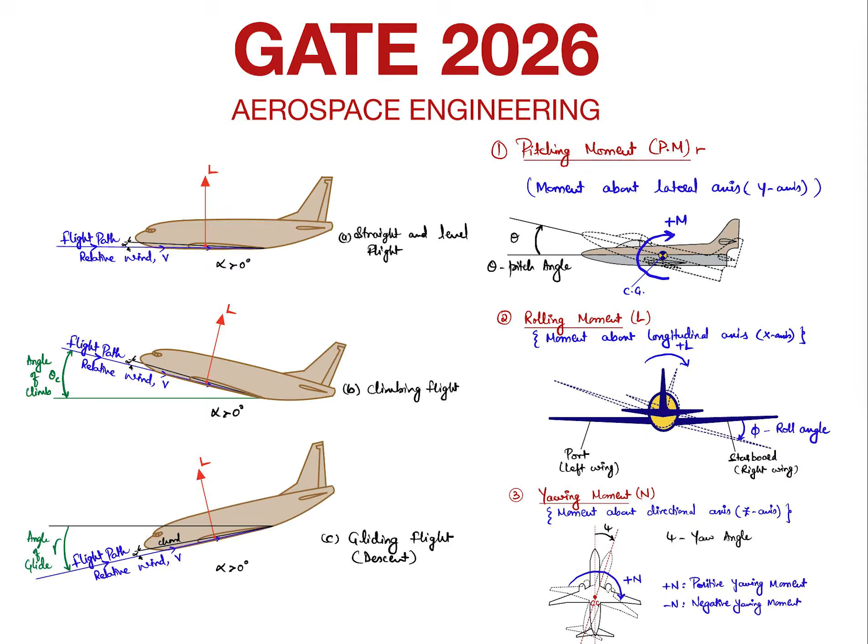What we have in GATE 2026. So the GATE exam is an exam which is like a common platform to assess everybody who has passed through engineering.

We are focused on aerospace engineering, so GATE AE 2026 tentatively will happen in the second week of February. Every year it happens mostly in the second week of February, probably on a Saturday or Sunday.

Its question paper will have 65 questions. That is also subject to change, they can change this, but for a long time they have fixed on this particular thing.

So it has two categories. We'll be teaching everything in the syllabus, even the math and aptitude. It has general aptitude, which carries 10 questions worth 15 marks. And you have a technical section.

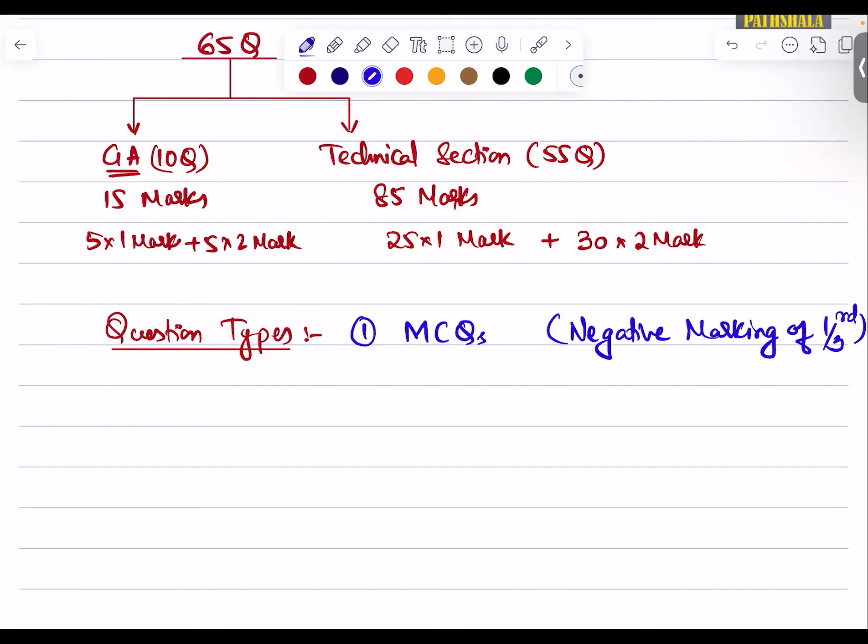Question types have 3 categories. The first category is called MCQs. You will have negative marking on this, negative marking of 1/3 of the mark. So if you make a mistake on a 2 mark question, 2/3 marks will be deducted. If you make a mistake on a 1 mark question, 1/3, that is 0.33 marks will be deducted from your positive marks.

Then the second category you have is MSQ. In MCQs, only 1 answer will be correct, whereas in MSQ, 1 or more than 1 answer will be correct.

Then you have the third category. This second and third category don't carry any negative marking. This is called numerical answer type, it will be a kind of numerical value which you will fill in the blank.

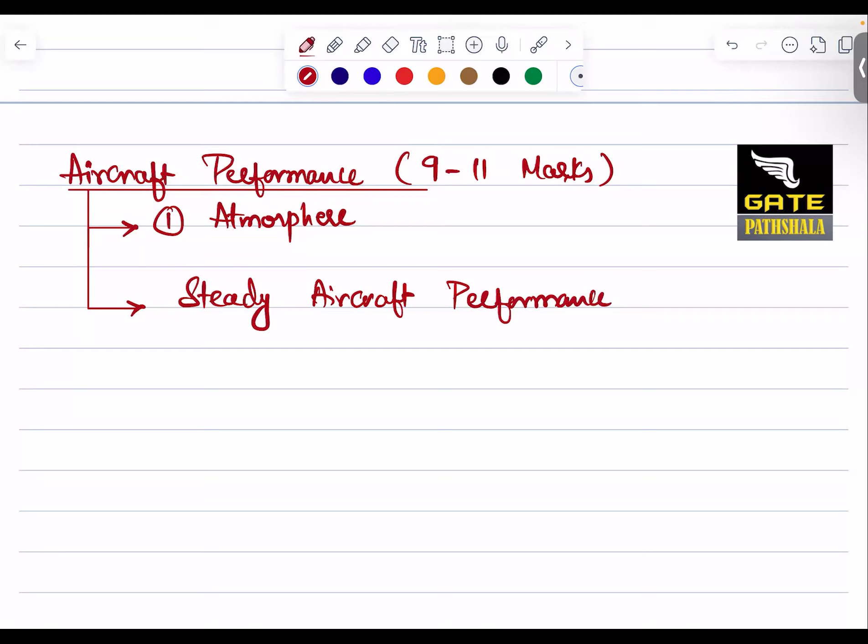Steady aircraft performance. In steady aircraft performance, we will begin with our first topic, that is our chapter 2, will be basics of flight mechanics. So what is lift, drag, mean aerodynamic chord, mean geometric chord, several other camber characteristics, what our flaps will do, what are control surfaces, all those things to do.

So probably in next lecture we'll cover up that. Okay, then we will enter into straight and level flight. Straight and level flight. Then

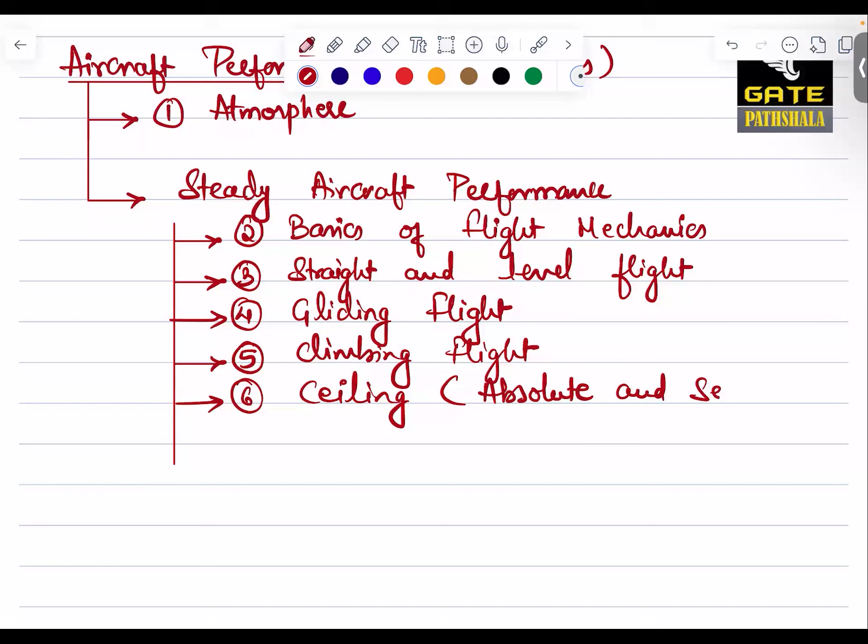we'll be going for something called gliding flight. Gliding flight is called the power-off flight. Then we have climbing flight. Then we'll be going for next topic called ceiling. This has two topics, one is called absolute ceiling and service ceiling. Okay, hope you guys are noting this.

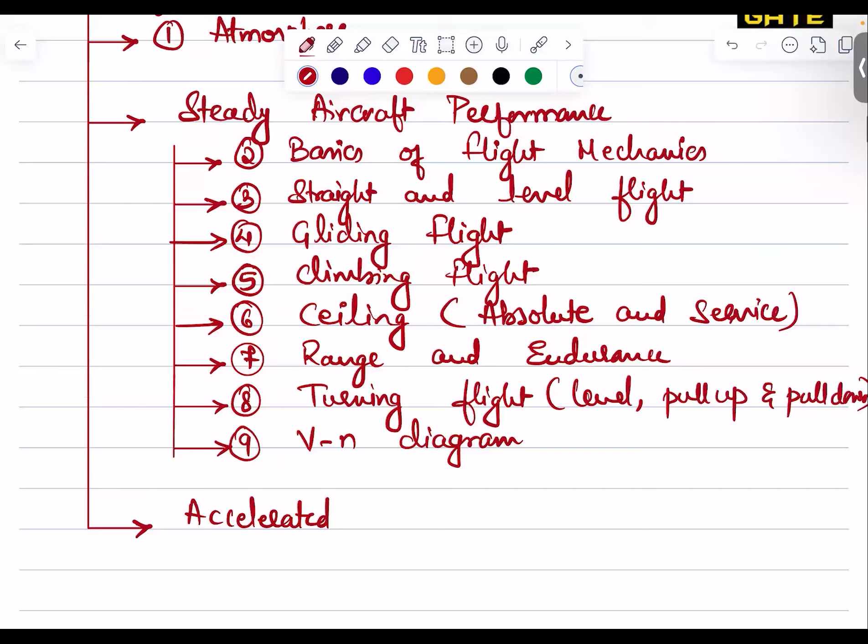Then coming back to this, again under the main aircraft performance, we'll have unsteady aircraft performance, or you can say accelerated aircraft performance, accelerated or decelerated. So once you are having acceleration or deceleration, it's called unsteady aircraft performance. So in its accelerated aircraft performance, again you have two topics.

This should become your chapter 10, that is called takeoff performance. Okay, next you write landing performance. Okay, can I go ahead, everyone? Hope you all noted. Yes, sir.

Okay, you write references for this. The first reference for this is Introduction to Flight, Introduction to Flight by John D. Anderson. Okay, then the next book is this book.

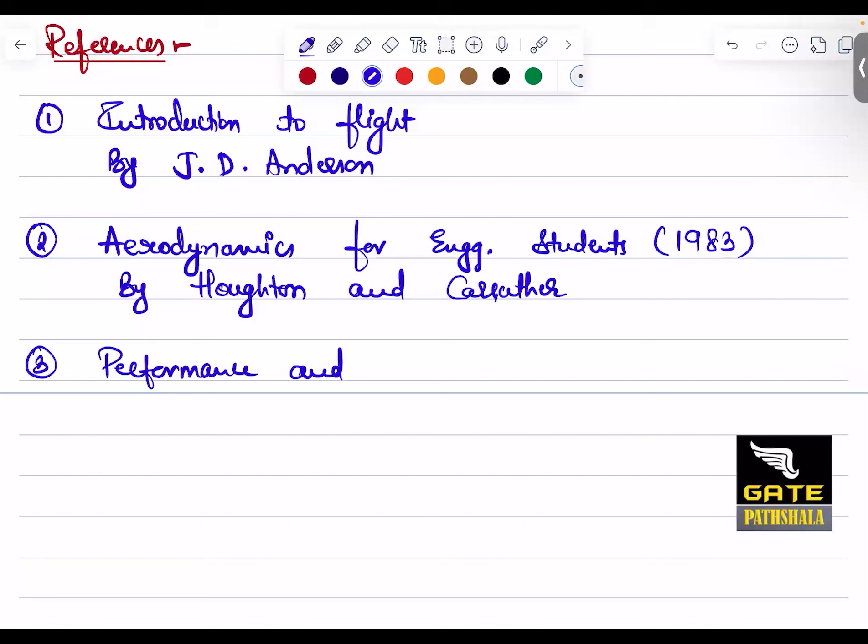Carru, Carruthers. Okay, then the third book that you should be using is Performance and Stability of Aircraft by J.B. Russell.

Then there are other books also. Okay, like you can make use of something called Bandu N. Pamadi, but that will take you to another level. So if you want to go for further higher levels, you can refer to books like Aircraft Performance by Maido Saarlas also, that's a slightly tough book. Okay, so this would be enough for you guys. Apart from this, you can use 1000 Solved Questions and Answers by Keith Williams, that is also a nice reference. Okay, can I go ahead, everybody?

Guys, can I go ahead? Yes, sir. Okay, so let's start.

So we'll begin with some basics. You write: airfoil nomenclature. Airfoil nomenclature. I'm assuming that you are just a 12th pass, you don't know anything about aeronautics or flight mechanics. So we are starting from scratch, assuming you don't even know what is called angle of attack, or what is camber line and all that. I'll quickly take you through all the basics step by step.

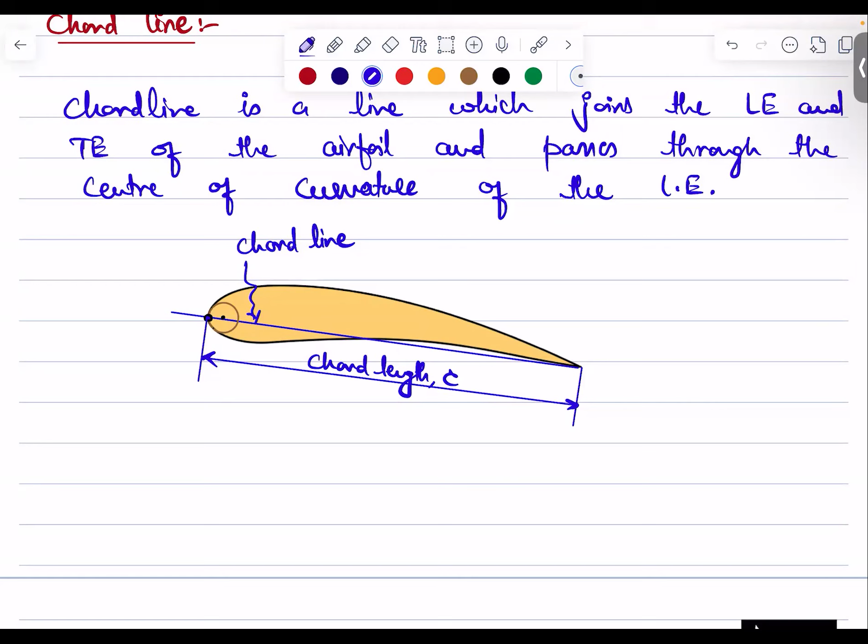Ashwin, you guys did this already, right? Yes, sir. Fine. Just bear with me for some time. There are some new joinees too. Sure, sir. Take it as some small revision. I'll add new things, obviously; that's my usual behavior. Every time I do something, I'll add new things. Okay. So, everybody noted this? Kishore? Brinda? There is a mute, unmute button. Please use that and respond. Yes, I have noted. Okay.

Write a heading, Camber Line. Now, let's draw the same airfoil which we have here. Let me copy this. For this airfoil, I want to know where my camber line is. One of the simplest ways is you can draw a set of circles and get the centers of these circles. Basically, a mean camber line is a line which divides the airfoil into two equal parts.

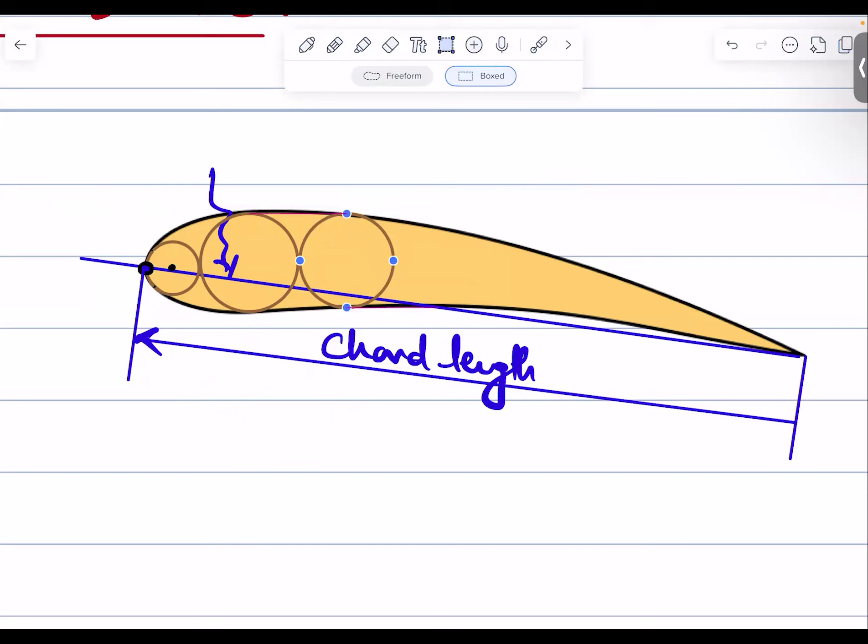So you can draw some circles touching the upper surface. In fact, you can draw the first circle, that is the nose radius circle, then the next circle like this, then the next circle like this. You fill the whole domain with these kinds of circles. Come on, quickly finish this. Parallelly, you draw this. Then find the centers of these circles and mark them.

Then, if you draw a line from the leading edge to the trailing edge which is the locus of the centers of all these circles, that line will be the mean camber line. This is the line passing through all these centers. This line will divide the airfoil exactly into two equal halves. The blue line is your chord line, whereas this one is your mean camber line.

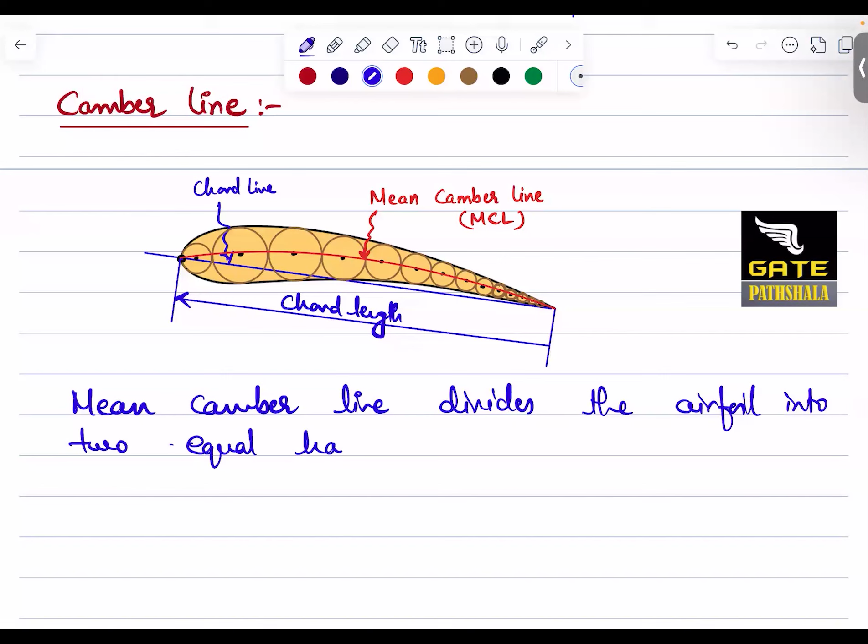Mean camber line. I'll refer to this as MCL. Mean camber line divides the airfoil into two equal halves, as shown in the above figure. Okay.

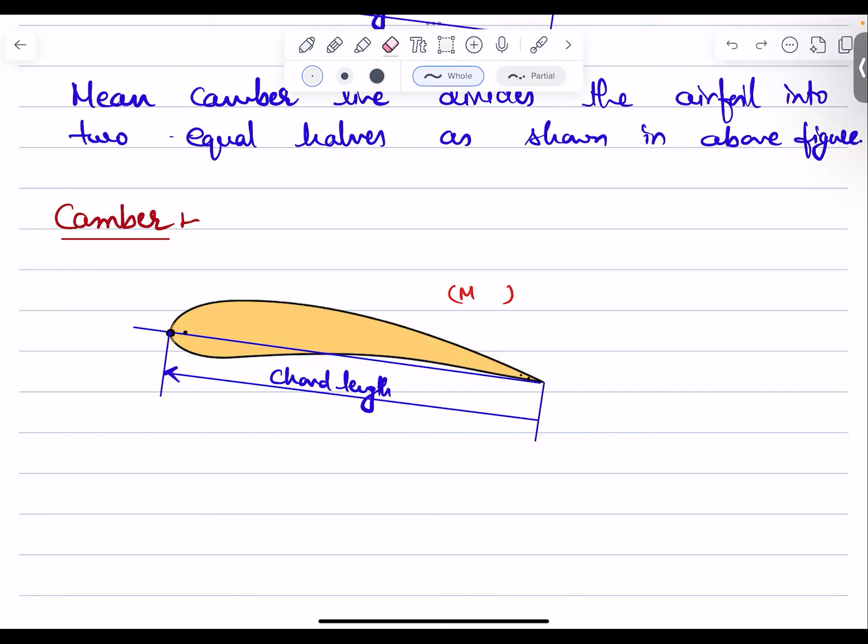Now write a heading, camber. Camber is nothing but some distance. Let's see what this distance is. What is the camber of an airfoil? Let me draw the same figure again, the previous figure in which we got the chord line and the camber line. Let me erase all these unnecessary things and put it here. You draw this figure, everybody.

So here you have two lines. This one is your chord line, and this one is your mean camber line. If you find the distance between the two lines, the mean camber line and the chord line, measured perpendicular to the chord, this distance is what is called camber. Can I go ahead, everyone?

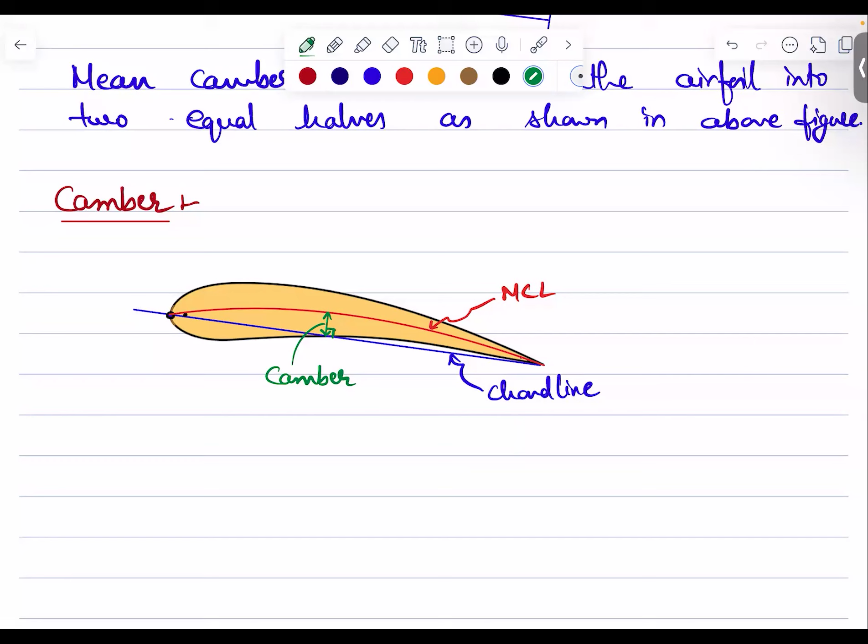Yes, sir. So you draw this and write: the transverse distance measured perpendicular to the chord line, between the chord line and the mean camber line, is called camber.

We'll go step by step. If you have any doubt, do not hesitate to ask. Every lecture, before class, in between or after the class, we are open for doubts. We are here to help you out. Fine, everybody. Shall we continue? Guys? Yes, sir.

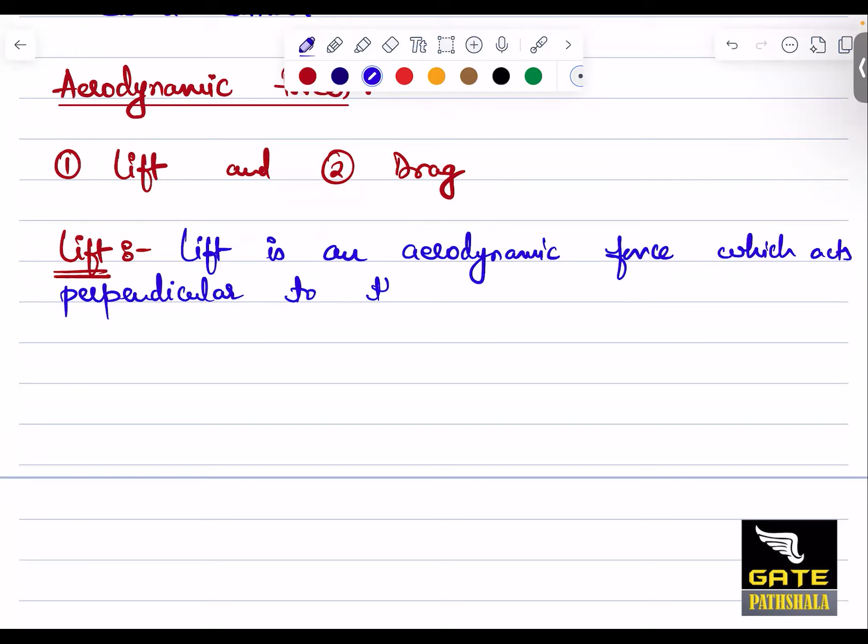Lift is an aerodynamic force which acts perpendicular to the relative wind. Okay. So how do we define this? Let me take that same airfoil. Okay. Let me take this airfoil. So there are different ways you should see it.

So usually a mistake happens because people teach this one way, like this. This is the most general way you will first hear about lift. That's why you think lift is an upward force. Okay. So you draw this. So what is this? This is your chord line. Okay. This is your chord line.

And let's say you kept this body in a wind tunnel and the flow is coming with a relative wind like this. So what is this? It is a relative wind. This is the flow which is coming with a relative velocity. You can say free stream for a while. So in this case, your relative wind is nothing but your free stream. So let's say flow is coming like this.

So this angle between the relative wind and the chord line is what is called the angle of attack, alpha. AOA, I use it for angle of attack. Is that fine, everybody? Can I go ahead?

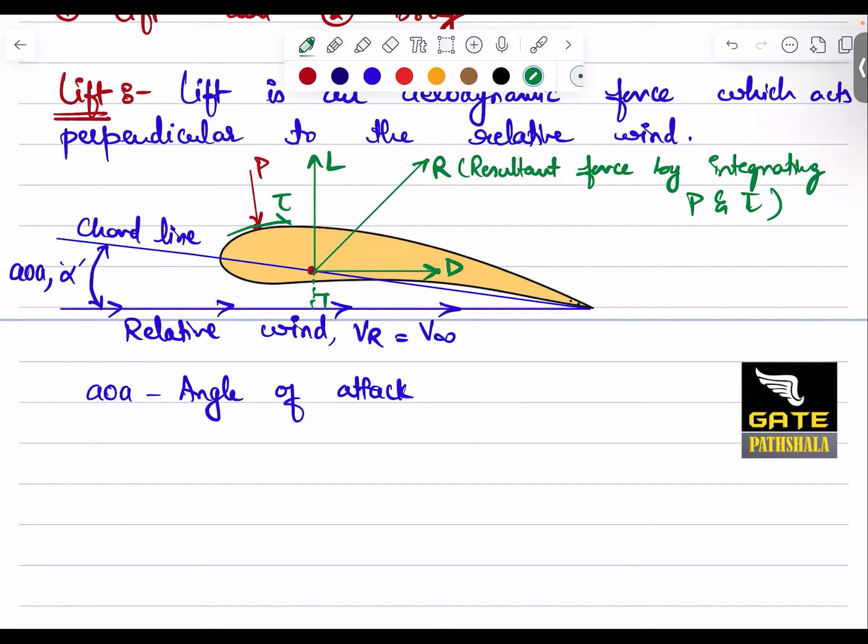Now, if you resolve this R parallel to the relative wind, you will get a force called drag. Draw this, everybody. Around the whole surface, when you integrate P and tau, you get this resultant force. If you resolve it, you get lift and drag. Perpendicular to the relative wind you get lift, and in the direction of the relative wind you get drag. Have you finished this figure, everyone? Yes, sir. Okay, let's go ahead.

Write a heading, drag. Further we'll discuss lift, then we'll go for the drag. So here, if I just memorize this, I'll think that, like she said, lift is an upward force. But it's not true in all cases. Now, let me take one aircraft. Let me take some nice aircraft for you. So this is my aircraft.

Now, this aircraft is flying from right to left. You make the airplane stationary and pass the relative wind in the opposite direction. How would the relative wind look? This will be the relative wind, if you stop your aircraft and pass it in the opposite direction. So the aircraft is moving through stationary air. We made the airplane stationary and we are passing the relative wind in the opposite direction.

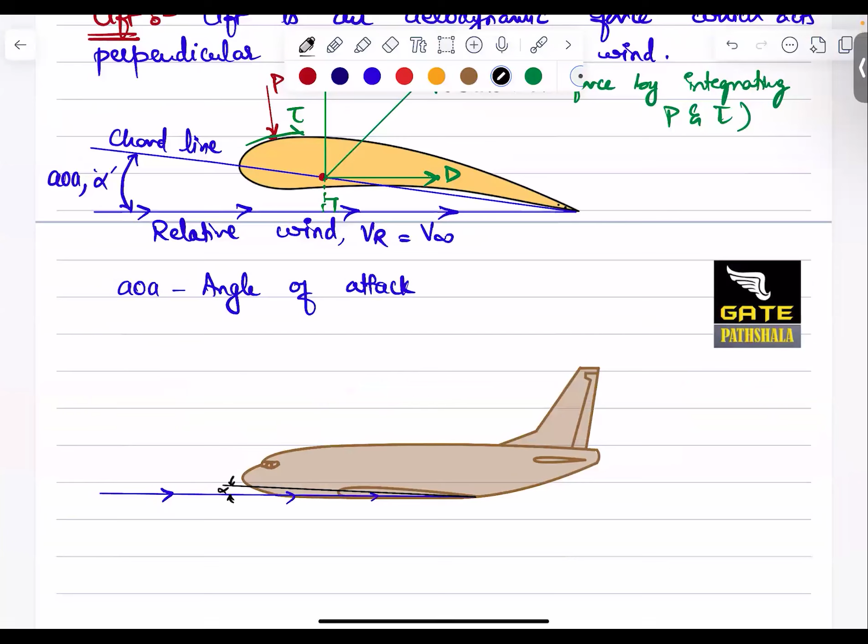And if I draw the chord line, this will be the mean aerodynamic chord line. So this is your chord line. The angles are very small, but you can see this is your angle of attack alpha. It's a positive angle of attack. The plane is going straight and level for now; later we'll change this. At this point, you draw lift.

Our interest is lift in this case. We'll focus on drag a bit later; you need a lot of information to understand drag. So this is your relative wind, or you can say flight path also. If you are not making it go like that, you can still say this line is the flight path. Lift is a force which acts perpendicular to the relative wind or flight path. Both are fine.

Even if we stick to this figure, lift is an upward force. Right? But that is not always so. That's why the definition of lift as an upward force is applicable to just a few cases. But lift as a force which acts perpendicular to the relative wind will be applicable everywhere. Can I proceed, guys? Yes, sir.

Okay. So this plane is in straight and level flight. The plane is not going up or down. It's flying straight and level. Write beside that figure: straight and level flight. So these are the cases. Let's go to the next case.

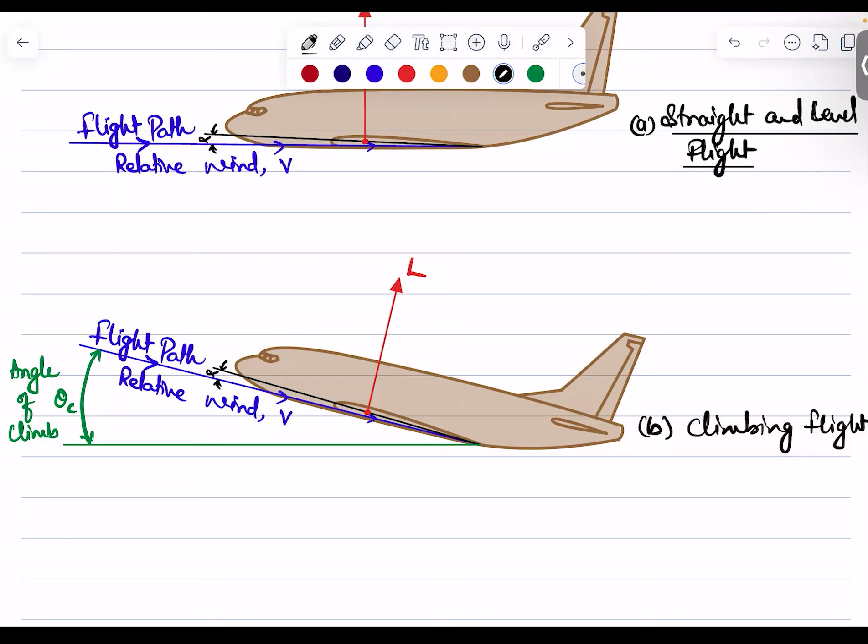Come on, guys. Don't try to become an artist. See, I made this figure by spending some time. In my free time, I draw things like this. For me, each and every part is different. Don't try to do that in one day. Can I proceed, everybody?

Yes, sir. Okay. Now take the aircraft and let's allow it to glide. This plane is going to descend from one altitude to another. So I stop the airplane at its instantaneous position and pass the relative wind in the opposite direction. Its flight path is going down like this. So this is also at a positive angle of attack. This is C. It's called gliding flight, or descending flight, or flight in descent. Make a note.

In all three cases, I kept the angle of attack the same. None of these are negative angles of attack. All are positive. Alpha is greater than 0 here, here, and here. They are not 0, not less than 0. Many people think this is a negative angle of attack flight. That is a really bad way of understanding negative angle of attack. Can I go ahead, everyone? Come on, be quick.

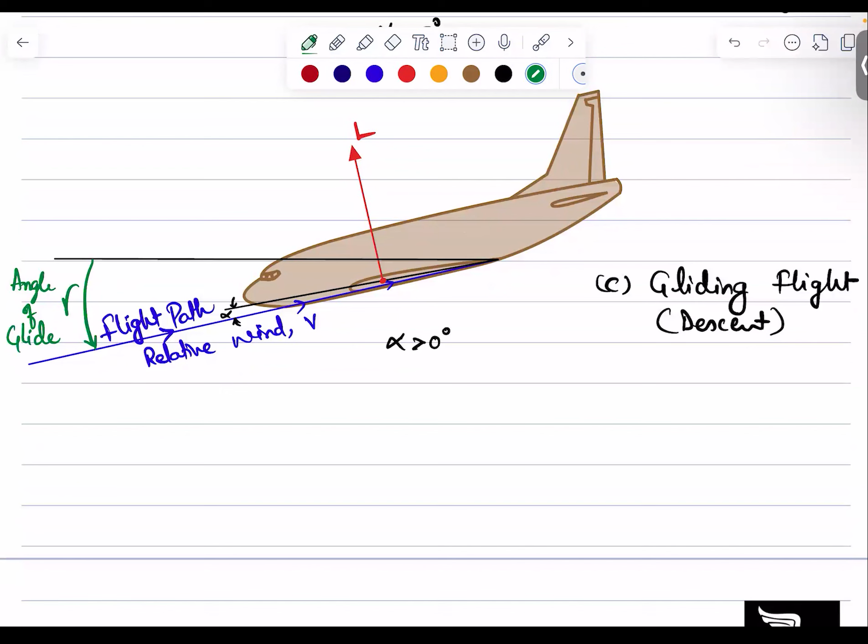So with this, you should have understood what is angle of attack. It is the angle between the chord line... this is the chord. So mean aerodynamic chord, we are coming to that. What is mean aerodynamic chord? We'll understand that. Hope you all are through with this, everybody. Yes, sir. Okay.

Now, you write a small subheading, angle of attack. Then we will continue with lift. Angle of attack. It is denoted by the symbol alpha. I prefer calling it by the short form AOA or small aoa. Okay. You write angle of attack: angle between the chord line and the relative wind

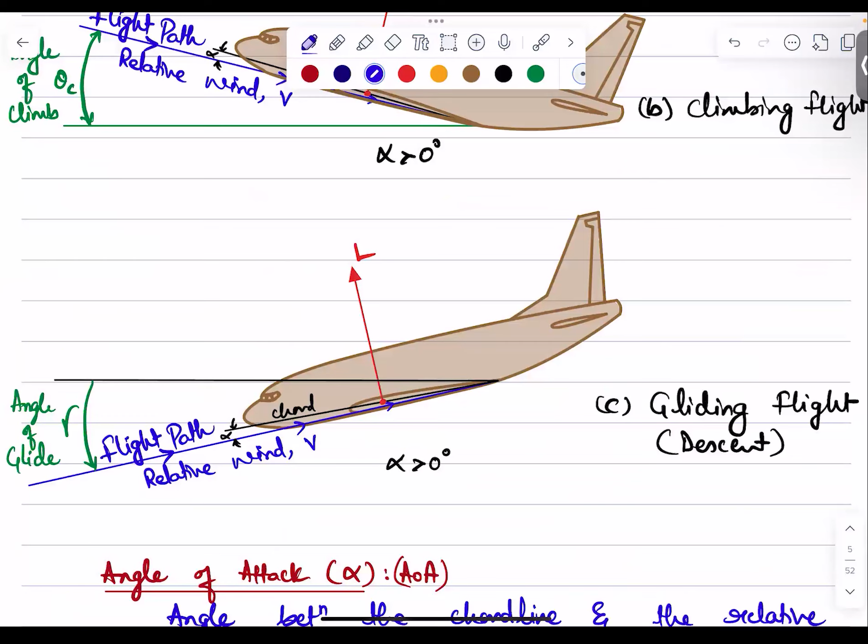Let's continue with what is lift further. Then you write types of lift. How many types of lift exist, guys? For some of you I already taught this. Ashwin, how many types of lift exist? 2, sir. What are those? Static, dynamic. Very good. Good job. Static lift, and the other one is dynamic lift. So let's see first what is static lift.

Okay. So static lift is produced by lighter than air vehicles. Examples of this would be airships, balloons, etc. Okay. So any vehicle which is lighter than air produces static lift. Okay. So we are interested in dynamic lift.

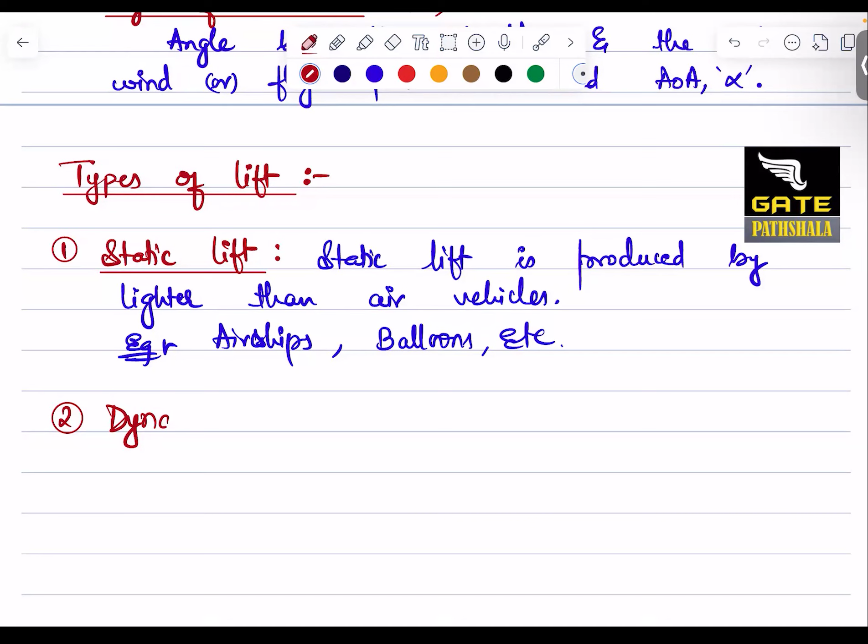Right. So you write our aircraft is a heavier than air vehicle. All aircraft are heavier than air. So you write dynamic lift. Dynamic lift is produced by heavier than air vehicles.

Examples of this would be aeroplane. Aircraft means it can be aeroplane, it can be helicopter, it can be drone also. Whereas aeroplane means it's a fixed wing. It cannot be a rotary wing. Okay. Aeroplane, helicopters, etc. So this dynamic lift is denoted by L.

And by using dimensional analysis, we can prove that the formula for that is L = ½ ρ V² S CL. This is our first equation today. Call this equation number 1. I'll give you what each term is. So here you write where L is lift, rho is the density of air at altitude h, V is the true airspeed of the aircraft.

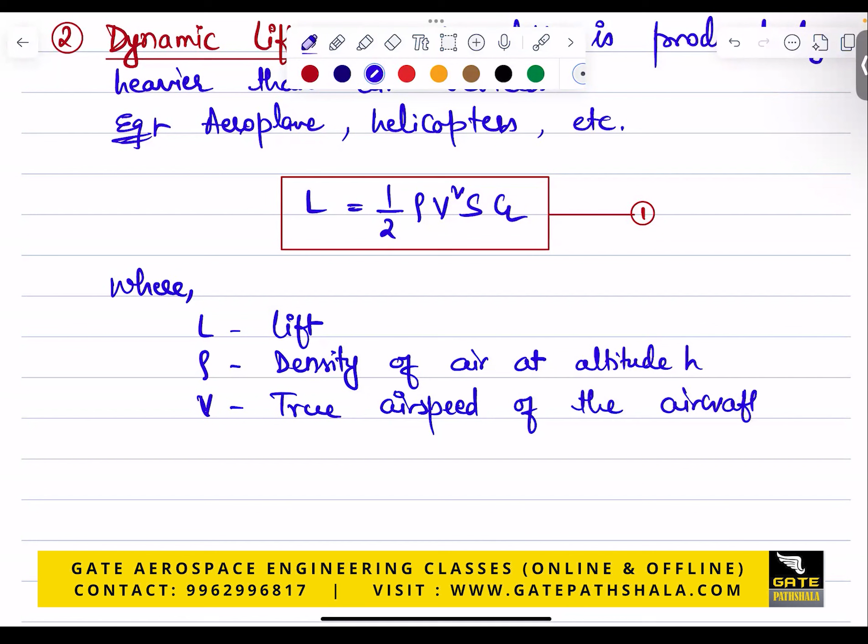So when to use true airspeed and when to use equivalent airspeed, we'll discuss after you understand what true airspeed and equivalent airspeed are. S is the wing planform area. It is not the surface area. Wing planform area means what you see from the top view, the top view projection. What you can project from the top view on a horizontal sheet is called wing planform area. The plan view.

CL is the lift coefficient. It's a non-dimensional coefficient called lift coefficient. Hope you all are through. Yes, sir. Okay. So then you have here one typical thing, S. This is our interest here. A lot of people make mistakes in finding this S.

So S is given by b into C bar. So what is this C bar? This C bar is called the mean aerodynamic chord. First we will learn what is mean geometric chord, then we'll come to mean aerodynamic chord. Is that fine, everybody? Only then you can find this lift. If you don't know how to calculate this C bar, you cannot get this S and you cannot get the lift. So our objective is to get the lift, right? Can I proceed now, everyone? Yes, sir.

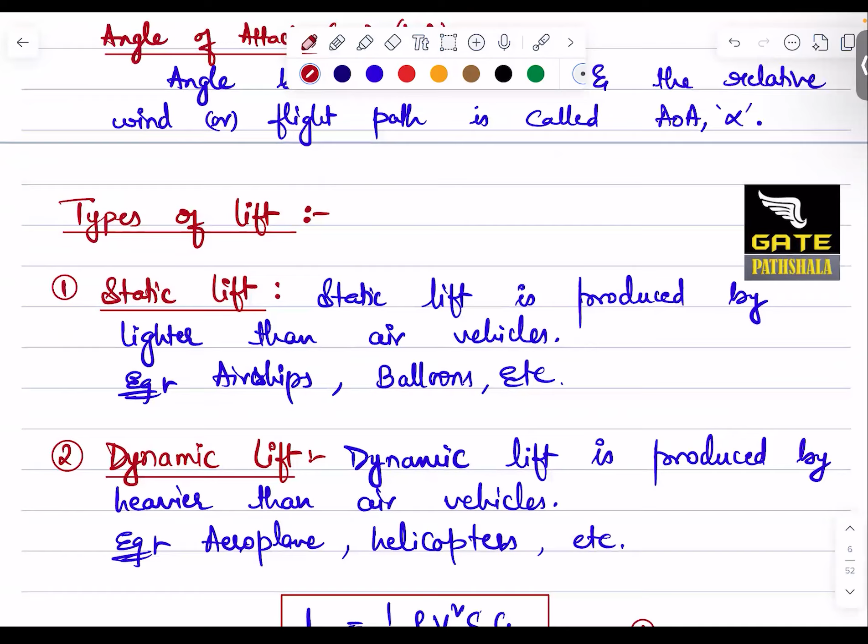Write a heading. Before I proceed with mean aerodynamic chord, let's look at a few other parameters we will be working with. For that, you need to understand what are the planforms. So you better write first: various wing planforms. Then we'll come back to the aerodynamic force called drag. I have mentioned that, but we need to work first on finding the lift and many ways of doing that. Then we'll come to drag.

So you write various wing planforms. In this you draw it like this. Let me check, I have nicely pre-drawn figures. Let me just get those figures. Okay. So you start drawing these wing planforms. This is a rectangular wing planform, the first one. Then you go for trapezoidal wing planform. Come on, start drawing all this. Then you go for swept-back wing planform.

Step by step, you start drawing one below the other. Try to keep the wingspan the same. Then you go with the delta wing. Let me just copy, then you can continue to draw.

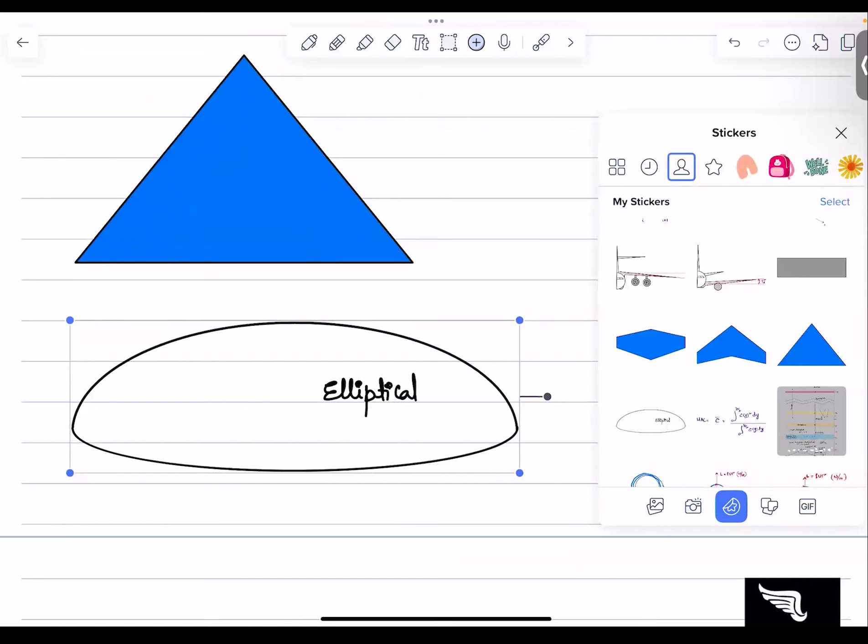So for all these wings, I am keeping my wingspan almost the same. That you need not have - you can have different spans, but for the sake of comparison, I need something common between them. I could draw it for the same area also, but that would become a different story. Shall we start drawing now? Come on.

So you can divide this. You can draw one straight line passing through the centers, so it could be like just one dividing line.

One second, I'll just change this. So you have the right side span and the left side span. The right side of the wing is called starboard - starboard wing, right side of the wing. And the left side is called port side, port wing, or port side of the wing.

For every wing it is like that. So the first one is my rectangular wing.

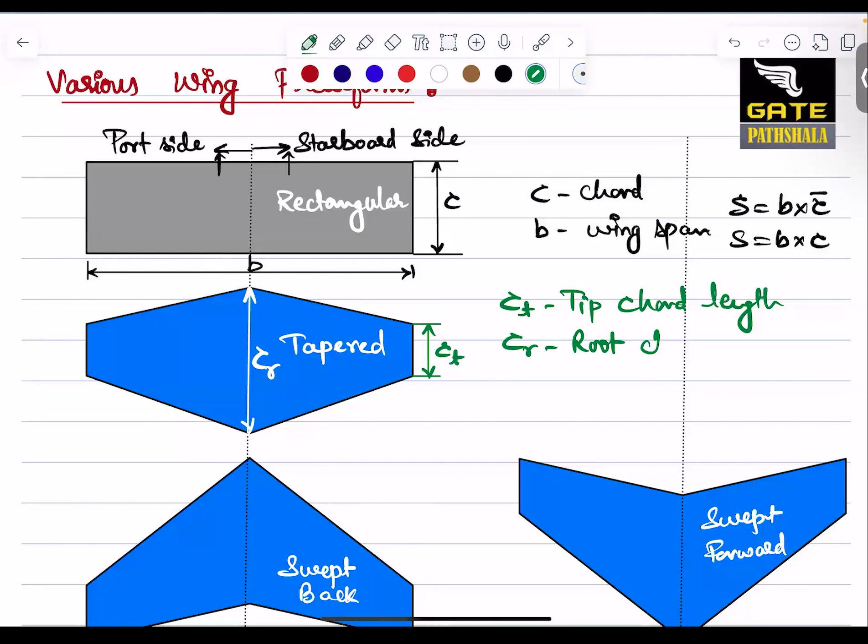So why is this wing called tapered? Because CT is not equal to CR. So whenever you have CT not equal to CR, it is called a tapered wing. So even in this swept back or swept forward wing, I have some taper ratio. So this new term I'm going to introduce is taper ratio.

So when we write the formula L equals half rho V square S CL, S equals B into C bar. B into C, length into breadth, is fine if you are writing for a rectangular wing. But here our problem is a tapered wing - so how do we account for the area of that? You write taper ratio lambda equals CT by CR. Usually the taper ratio lies between 0 and 1. Here, what was the lambda value?

What is the lambda value for a rectangular wing? How much is the taper ratio for rectangular? Respond... 1. Okay, so this is 1. And if I go down to this delta wing, what is its taper ratio? It will be 0, because CT is 0, tip chord length is 0. So taper ratio is 0 for a delta wing.

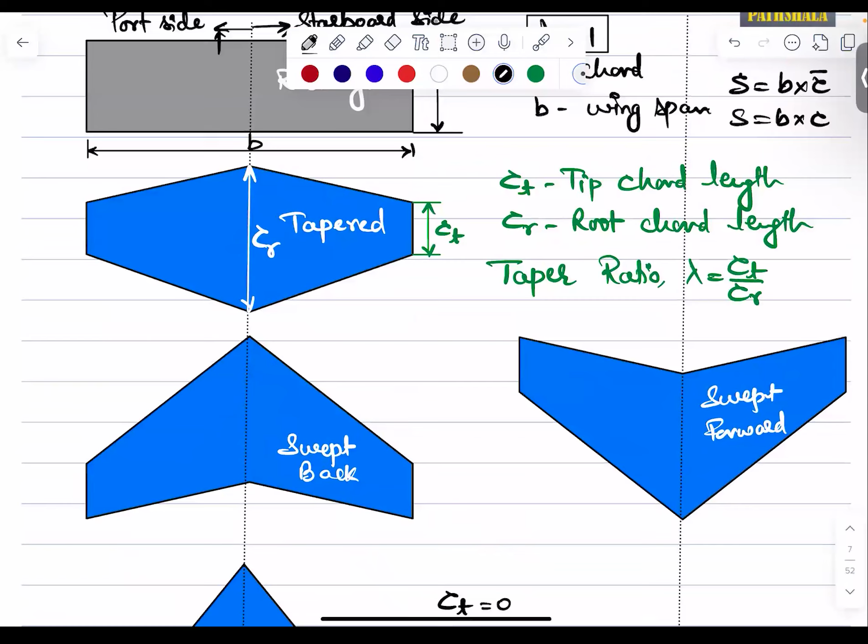So remember this taper ratio, let me drag this down. You can write these things around this figure. So this taper ratio, lambda, lies between 0 and 1. If it is 1, you are having a rectangular wing. If it is 0, you are having a delta wing. So lambda equals 0.

So here also you can show this is your tip chord, CT. And this is your root chord, that is your CR. You can mark CR here. Can I proceed, everybody? Hope you noted this part here.

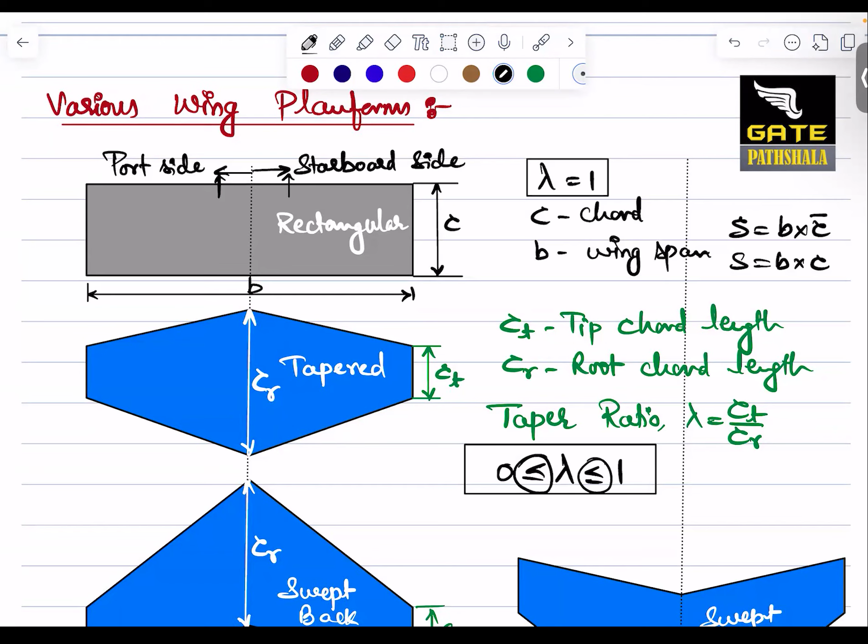So if you are having a tapered wing, this lambda cannot be equal to 1, and it cannot be equal to 0. It will lie between 0 and 1, but not at the end points.

Okay, let's go ahead, write a heading: mean geometric chord. First we will see how to find the mean geometric chord. MGC, mean geometric chord.

So it depends on whether you are having a supersonic or subsonic aircraft. We'll take supersonic as of now. So let me take one typical plan form, semi-span of the plan wing I'll take.

Let me just check through this one second. Oh, I don't have it. One second, guys, let me... I spend a lot of my time creating these figures which can help me put things in the right way.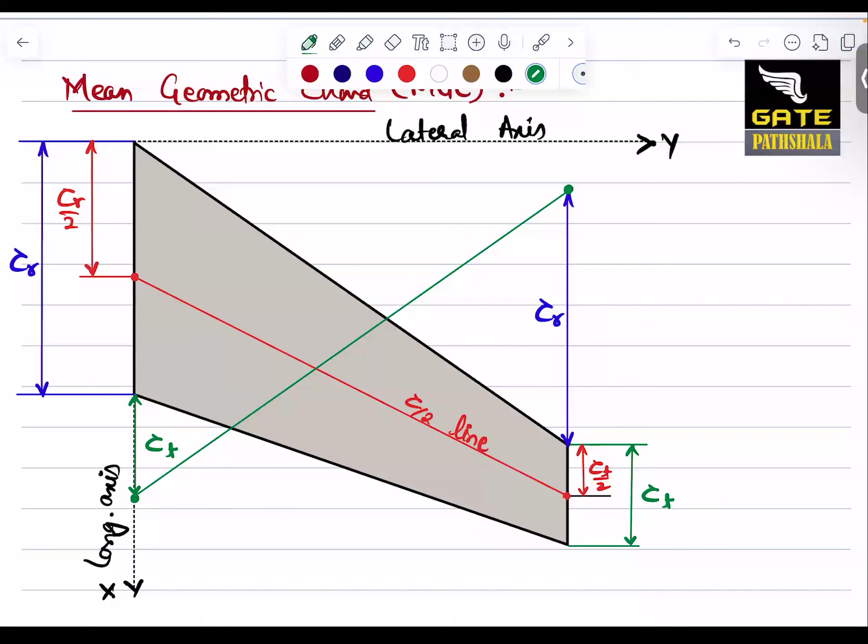Do that. Now you have these 2 points, join this point and this point, you'll get one line like this. I maintained the colors also so that you understand which distance I have copied and where I have placed it. Okay, I'll get this point.

And through this point, now you draw a line which passes through this point, the leading edge, and the trailing edge. So this is a line which is parallel to your longitudinal axis. Draw such a line, everybody do that. I have this line, so from here to here I'll measure this distance. This is my mean geometric chord. And it is a very good design practice to take this itself as the mean aerodynamic chord very often.

So this distance that you have here, from this to this, what is this distance? Can somebody give me this distance? From the longitudinal axis to this tip, how much is this distance? Guys, B, right? No, it is B by 2. Half of the wing, it is just half of the wing, right? How can it be B? It has to be B by 2.

Okay, so remember you have taper ratio, lambda. So taper ratio here, lambda is CT by CR. So your mean geometric chord is this length. Hope you all did this. Can I go ahead? Yes, sir. Okay, now you write one note.

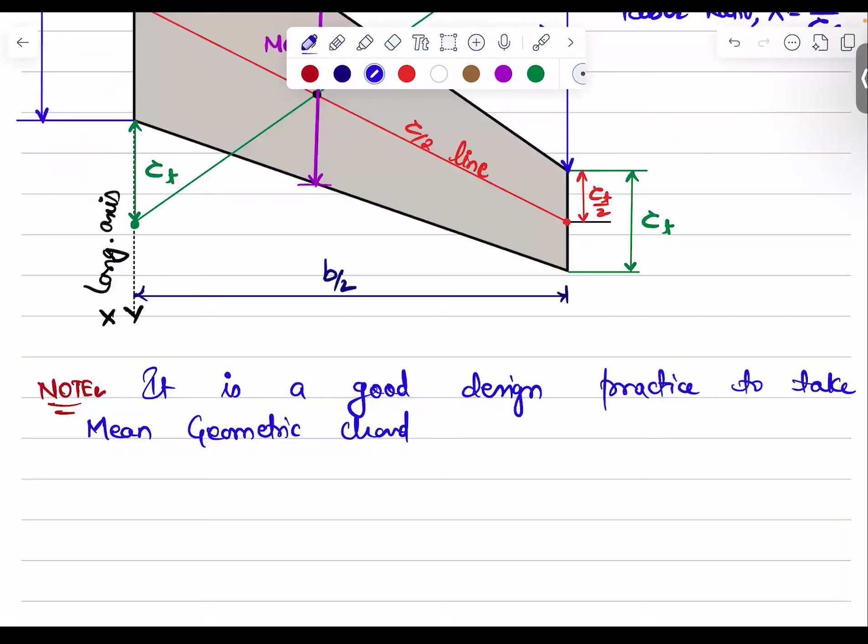It is a good design practice to take mean geometric chord. If it is a subsonic airplane, we will be having the C by 4 line like this, and we will have mean geometric chord here. So it is a good design practice to take mean geometric chord equal to mean aerodynamic chord. So the question is, what is this mean aerodynamic chord first of all?

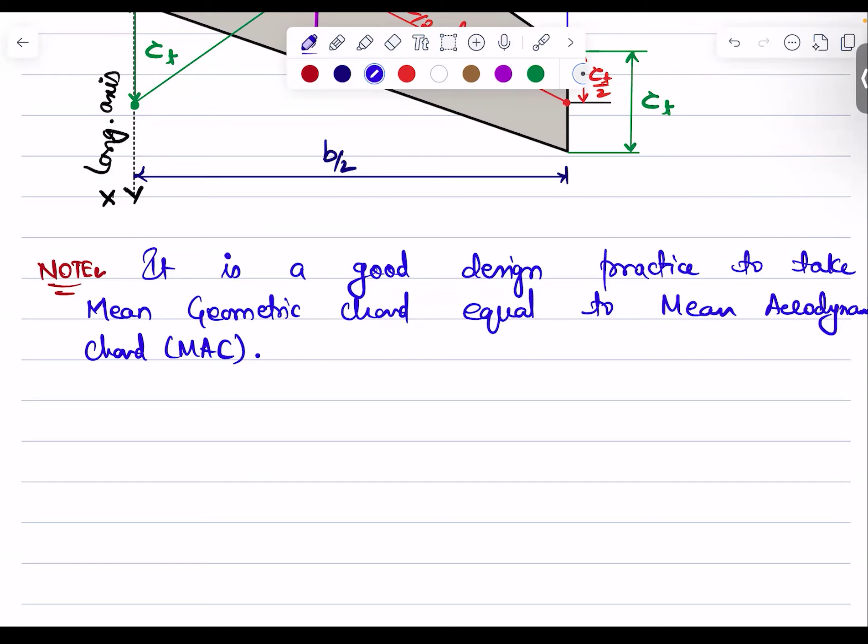MAC, we'll see that. Now we know MGC. Let's equate it to MAC and then we'll understand the usage of this, why we need such a thing. Can I proceed, everyone? Hope you noted this. Guys? Yes, sir. So now let me take this.

So I have this as my, let's say, C bar. So we got this as our mean geometric chord equal to mean aerodynamic chord, I am taking. So I can draw a semi-wing with this mean geometric chord equal to mean aerodynamic chord. Let me just make it thicker. One second, not getting nicely aligned.

So now I'll get in for the same span. See, here I have not changed the span. Span is still the same. So this area is clearly a rectangular area. So the area of the trapezium, which was half of the wing, was CT plus CR.

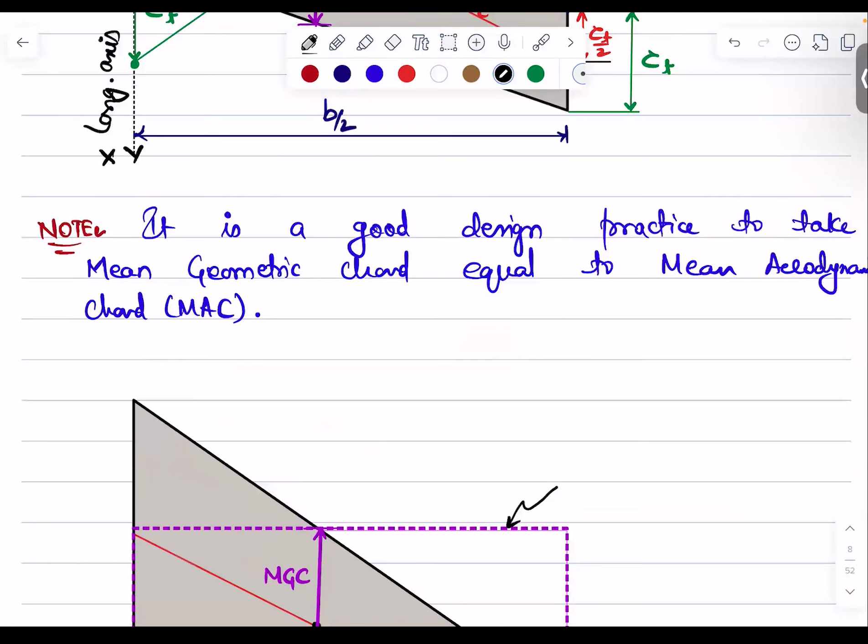See, if you have any trapezium like this with parallel sides A, B, and height H, how do you write its area? 1/2 A plus B into H, that is A plus B into H by 2, right? Is that what you said? Yes. Good.

So we have here such a thing. What you will get? CT plus CR into H, which is B by 2. So from this, we get only half of the wing, since we are looking at only starboard, that's why I wrote S by 2. So if I strike off this 2, I'll get the wing planform area clearly. Wing planform area S equals to CT plus CR into B by 2. That's my wing planform area for this.

Now, what is this purple color thing? It is the equivalent rectangular wing, which has area S equals to B into C bar. Hope I'm making sense.

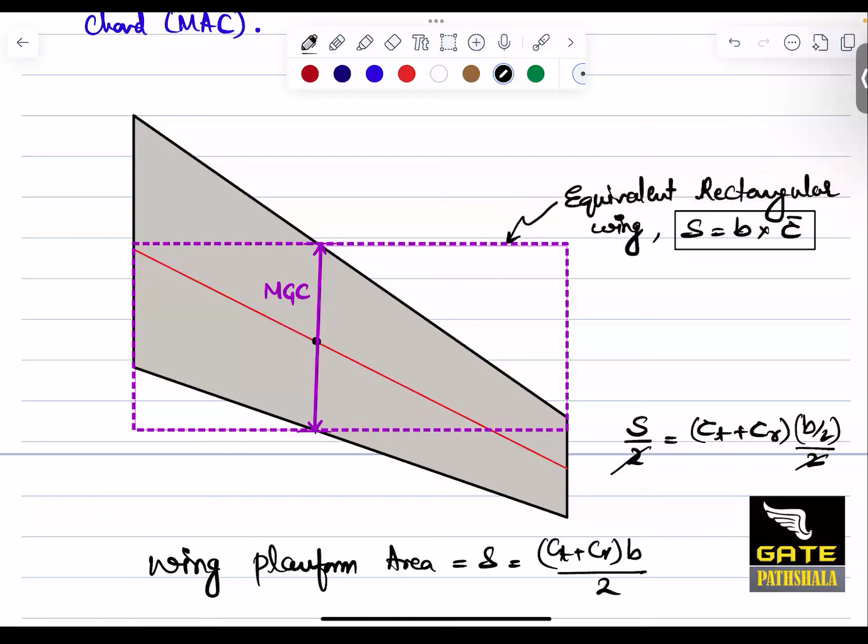It isn't every time you use the formula L equals to half rho V square S CL, you are finding this equivalent wing planform area. If you are using S equals to B into C bar, that C bar is mean aerodynamic chord. So this equivalent rectangular wing should produce the same aerodynamic forces and moments as that of the actual wing. This is your actual wing and this is your equivalent wing.

Now there would be another requirement called Y bar, the location of this. If you want to find this Y bar, you can take the moment of the area by considering a thin strip. This is Y bar. So you write location of mean aerodynamic chord, MAC or MGC, is given by Y bar equals to.

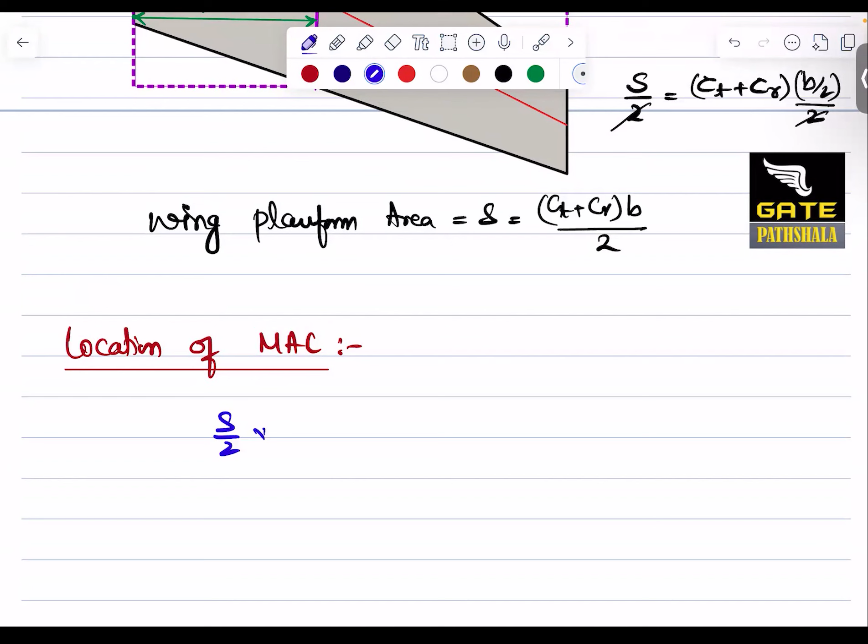Or you take the moment of the area. This area is S by 2, semi-wing, right? Into Y bar, about the longitudinal axis you take the moment of this area. This area S by 2 into Y bar should be equal to, if I consider any y with a thin strip like this at a distance y, a strip theory, considering a thin strip with chord length c of y, having thickness dy. This thickness dy is measured, kept at a distance y from the longitudinal axis. Draw this, everyone. Then we'll take the moment of the area.

So this line is your vertical; the line that I am drawing here is your longitudinal axis. This one is your longitudinal axis. Okay. So I'm going to take the moment of this thin strip about this longitudinal axis, and of this whole area, I'm going to take moment about y, the longitudinal axis. So you will be getting this.

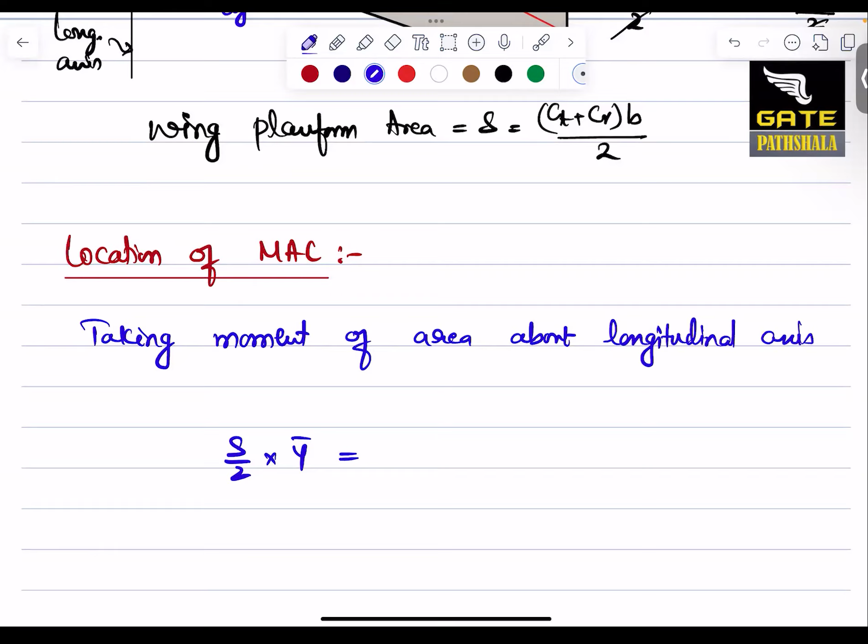So you write: taking moment of area about longitudinal axis, S by 2 into y bar equals 0 to b by 2. What is the area of that small strip? C of y into dy. That is the ds. This is your ds. ds into y. Take this. So you will get y bar equals 2 by S, 0 to b by 2, c of y into y dy.

Bracket this thing. Call it as equation number 2, or you call it as 3. There is one more important equation for which I didn't give numbering. Okay, hope you finished till here. You give this equation a number 3. Okay, everyone. Can I proceed, guys?

Yes, sir. Okay, see here, what we have is the taper ratio. You bracket this and call this as equation 2. One I gave for lift. Call this one as equation 2. Then you write area of the thin strip is ds, that is equal to c of y dy. Okay, so integrating this ds, you can get S.

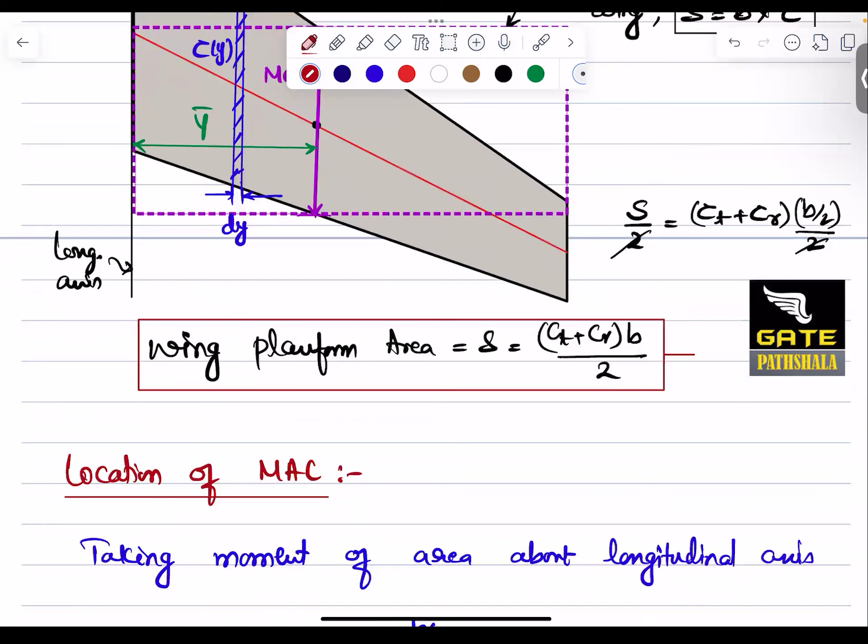I think you can leave this. Just bracket it. You can call this one as equation 4. Okay. If they give c as a function of y, this is one of the best ways to compute the location of mean aerodynamic chord and everything. Now coming to mean aerodynamic chord, C bar. Write a heading, mean aerodynamic chord.

There's a nice theoretical expression which you can use. So you write, mean aerodynamic chord can be found by using C bar equals 0 to b by 2 C of y into ds divided by 0 to b by 2 ds. Or you can write minus b by 2 to b by 2 C of y ds divided by minus b by 2 to b by 2 ds.

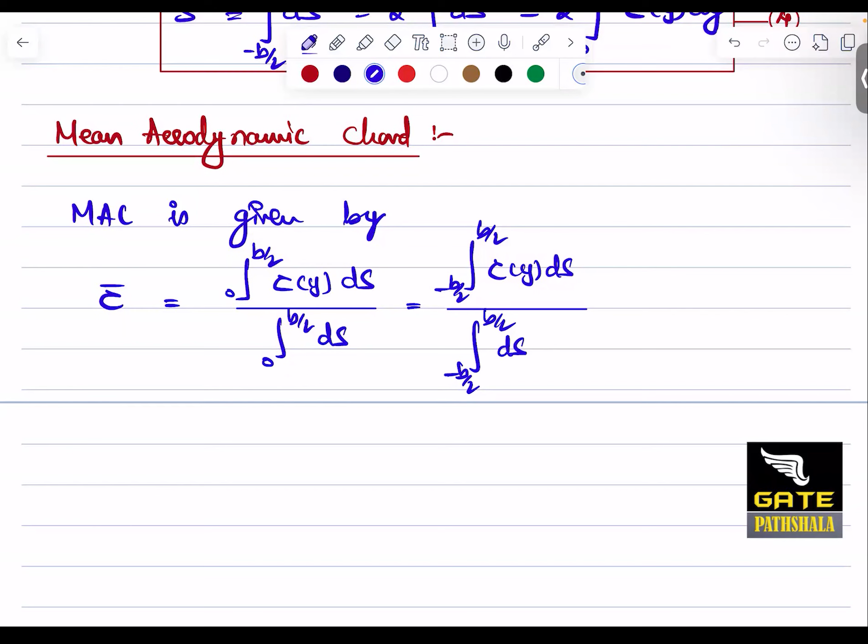Okay. So what would this become? What is ds? C into dy. So you can write this as minus b by 2 to b by 2 C of y into C of y dy, and this is minus b by 2 to b by 2 C of y dy. Okay. Can I proceed, everybody? Hope I'm making sense. Respond, guys. Yes, sir.

Let's go further. So from this equation, what is your denominator? The integration of ds is S, right? So you can write your C bar as 1 by S, minus b by 2 to b by 2, C of y square dy. That is equal to 2 by S integral 0 to b by 2 C of y square dy.

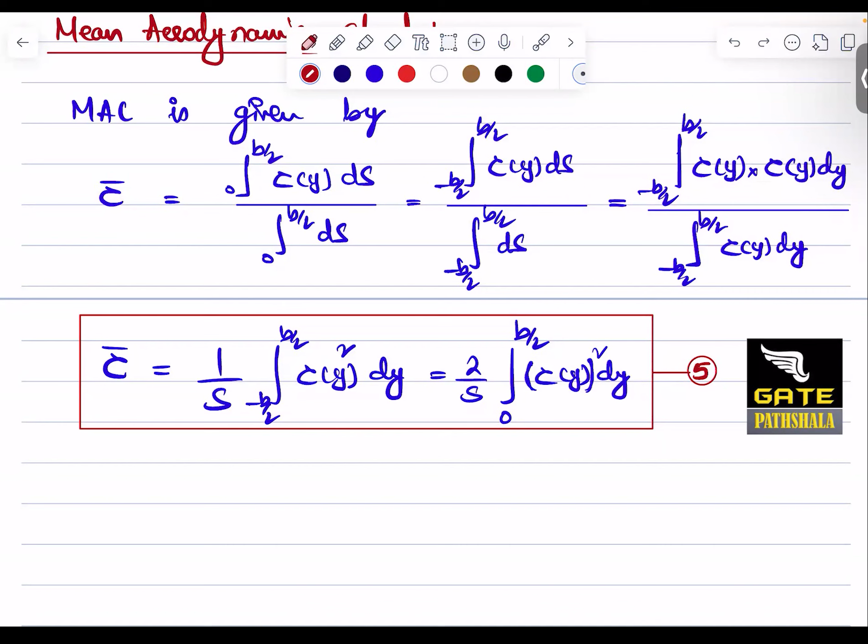So now, if you know C bar, you can multiply C bar with b and get the wing planform area. Using that wing planform area, you will be able to compute half rho V square S CL. So to find that S perfectly, you need to know C bar, and to know C bar, you need to know these formulas. Let's go ahead. Now I'm slowly going to pitch into what is called aircraft performance. Let's dig into this.

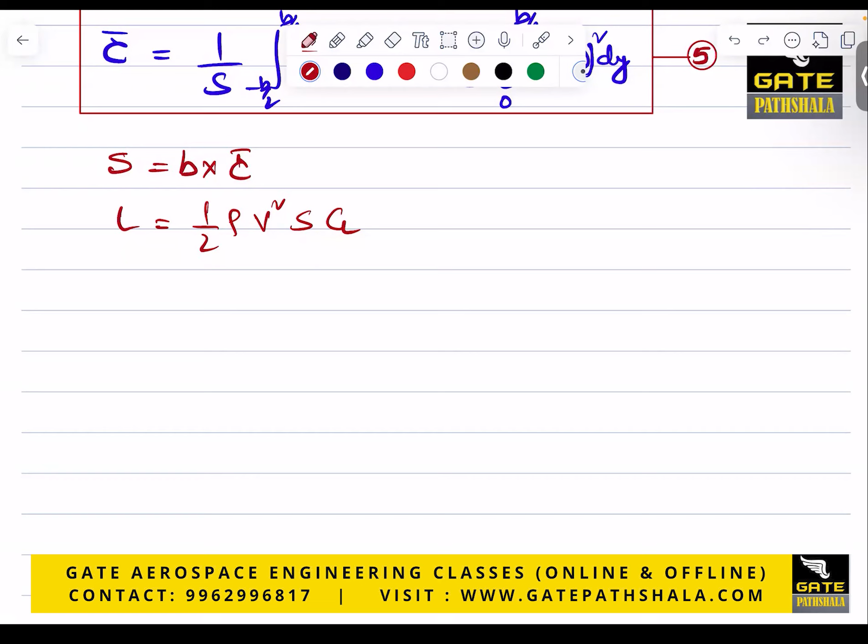So write some. The aerodynamic forces, that is what is called drag, we will discuss in more detail after a break. Okay, but not after a break, maybe next class. Today our main focus would be on the topic atmosphere, but you write a few more things.

So you write next: drag. Just a definition and then we'll go ahead. Drag. So you write drag is an aerodynamic force. So if I talk in terms of sentiment, what is drag? Drag is an enemy of the aircraft which tries to resist the motion, the forward motion.

But this drag is very, very necessary when you are coming for landing or you want to reduce your speeds. Okay, so this drag, your enemy of the aircraft, has to act as your best friend when you are descending or decelerating or you are coming to land. Okay, so drag is an aerodynamic force that acts in the direction of

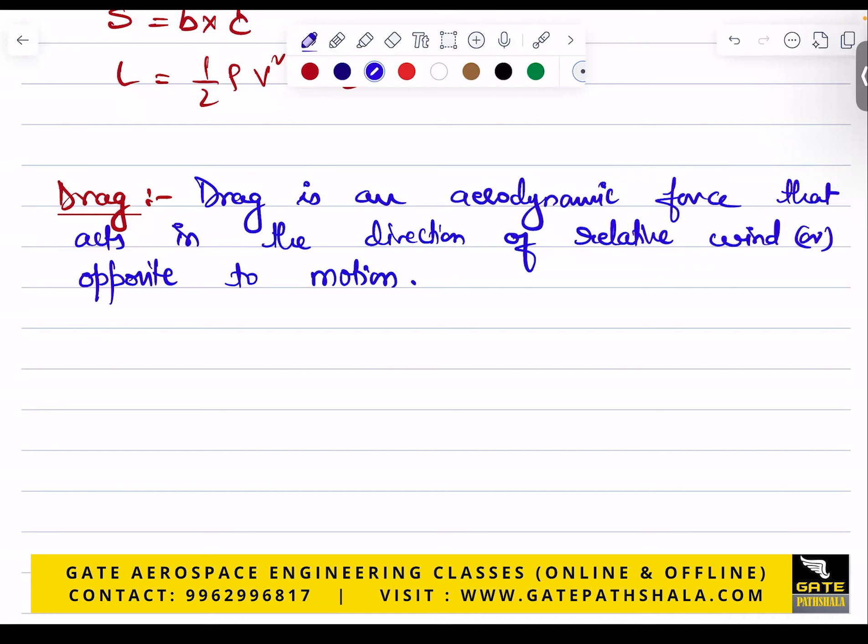relative wind, or you can say, which acts in the direction of relative wind or opposite to motion. Okay, opposite to motion. If the aircraft is moving forward, the backward will be the drag force. So we saw that drag already in the figure, right? So there are many varieties of drags.

Now the aircraft has typical moments. We will discuss that. Moments. So you write: the aircraft in general executes three principal movements about three principal axes. First about the lateral axis. So you write first moment, pitching moment. Commonly we write it as PM. It is the movement of an aircraft about the lateral axis.

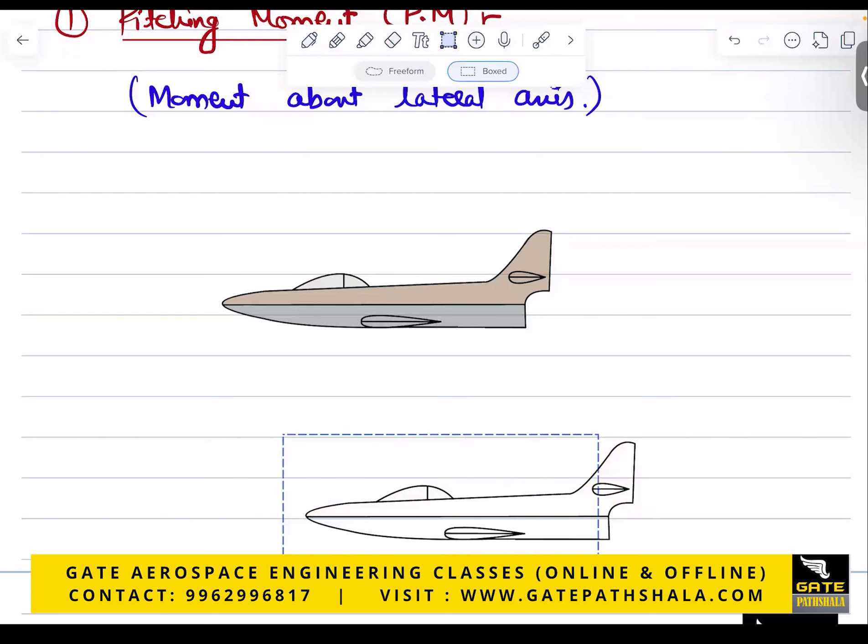So it is a movement about the lateral axis of the aircraft. Moment about lateral axis is what is called pitching moment. So let's see how this moment will look like. Let me take some nice aircraft for it. Draw such an aircraft, everyone. Come on, be quick. So about the lateral axis, if I make a movement,

so this would be the moment. In this case, the airplane has got pitched up. This is called pitch up moment. So it would create a change in theta. Let's say this moment is about the CG. So you are taking a moment about the CG of the aircraft. I pitch this airplane about its CG like this. So this is the CG of the airplane.

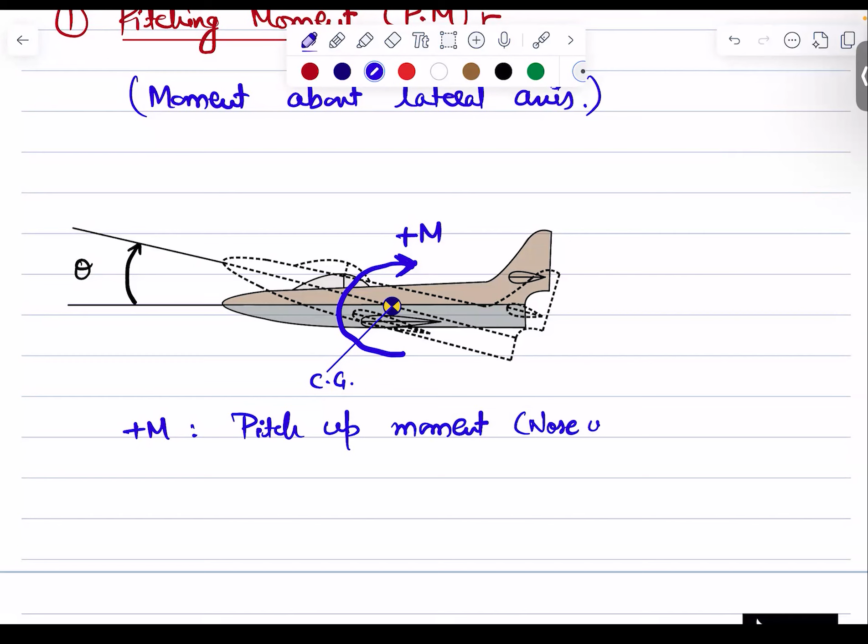So this is the moment about this airplane. You can have plus M. If you are going down, that is called minus M, anti-clockwise. So plus M is a pitch up moment. You should not remember the moments by clockwise or anti-clockwise. Rather, just look at its nose going up. Nose up moment is also called pitch up moment or positive moment.

If it is minus M, it will make the airplane's nose go down. The whole nose will go down. So minus M is the pitch down moment, that is nose down. Hope you all made this figure. Can I go ahead? Okay, so remember this moment is about the lateral axis.

Now you write second moment: rolling moment. It is denoted by L in general. Lift and also moment in aeronautics are denoted with L. Rolling moment. Now let me take some nice aircraft for it. Draw an aircraft. So here I am showing you the rear view of the aircraft.

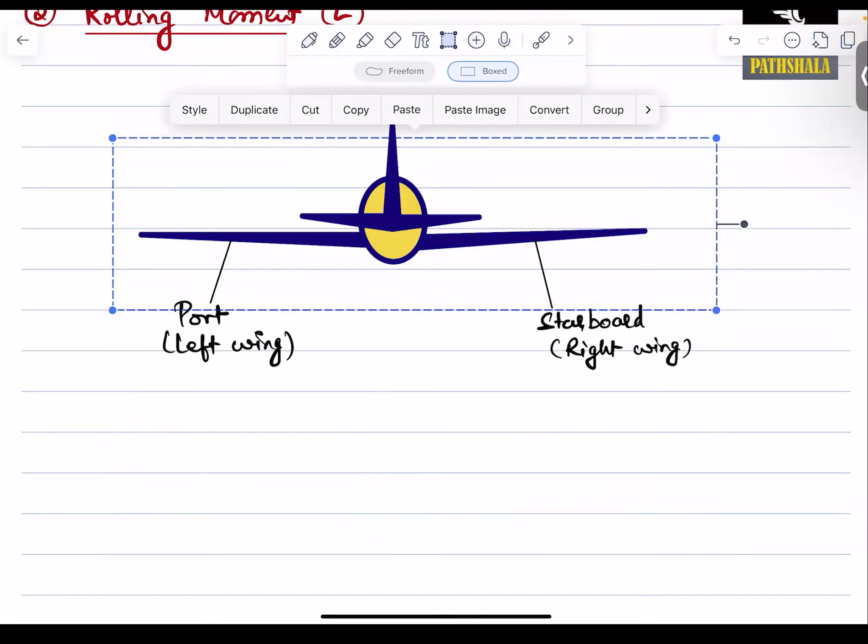So this is a wing which is the starboard wing, the right wing. And this one is called the port wing, that is your left wing. So if this wing rotates about the longitudinal axis like this, rolls about the longitudinal axis, this is what is called rolling moment.

So if the wing goes to the right side, it is called plus L. Fine. Here you have plus M, here I am showing plus L. So this angle that it creates is phi. Theta was the pitch angle. Mark that theta as pitch angle. Go back to the previous figure.

I totally forgot to give you a break. After just finishing one more thing, I'll give you a break. So at 8 o'clock, please give me a reminder. I have a habit while teaching, I forget what is happening around, I have this lapse of time,

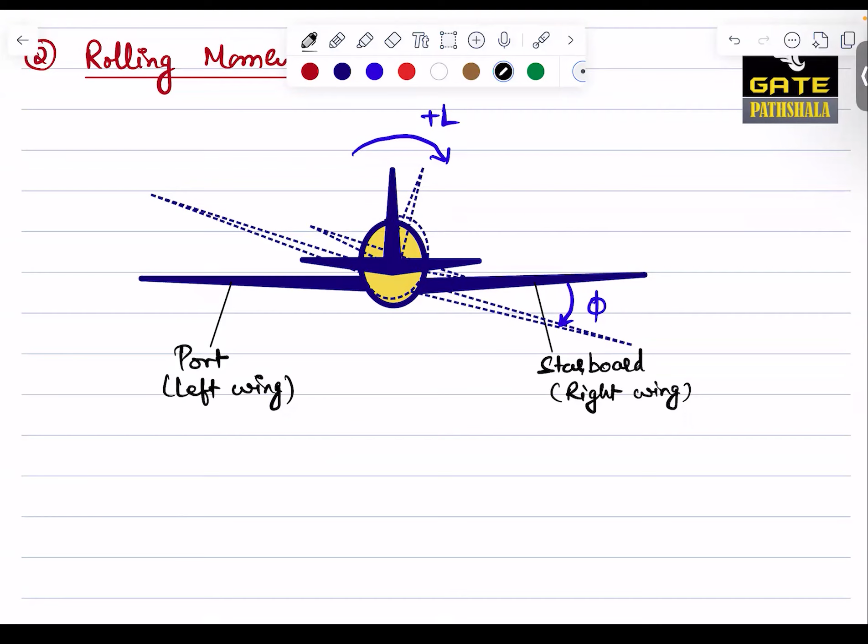Okay, this phi, you call it the roll angle. Call phi the roll angle.

You guys are my new batch that started with this. You guys are my 115th batch of GATE Aerospace. I am teaching this since 2008, 2006 actually.

Can I go ahead, everybody? Yes, sir. So this plus L is called positive rolling moment. If you have minus L, that is, the port wing goes down, then you will call it negative rolling moment.

We'll add the formulas also. I just missed them for the pitching moment. I'll mention them. First, you write this. So here, hope you have some space. This pitching moment is M, that is equal to half rho V square S c into Cm. Bracket this. What's the equation number, guys? Sixth equation, sir.

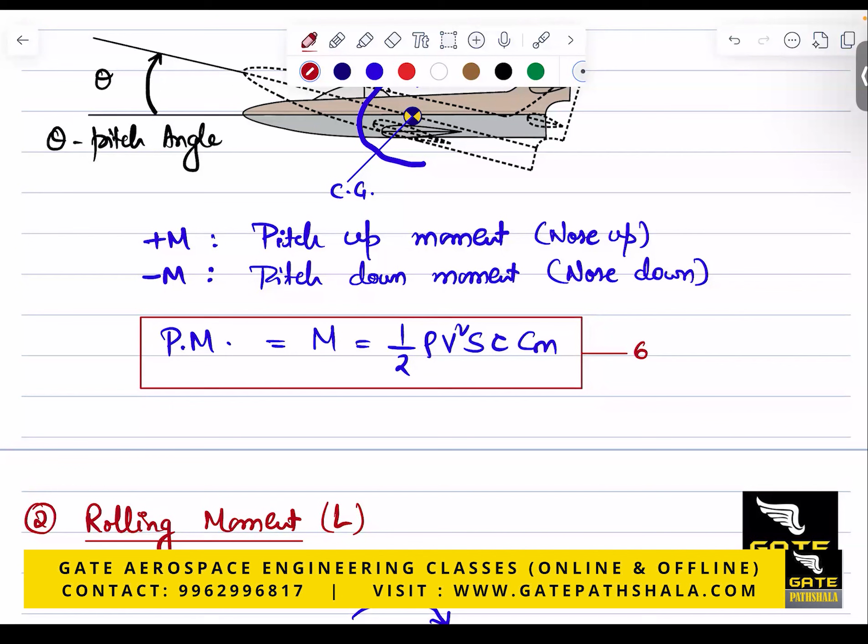Fine. Now come to this and write the rolling moment. Rolling moment, which we call L, is equal to half rho, if you get confused you can add LR, half rho V square S b into Cl. C small l, capital C small l. This is not the lift coefficient. It is the rolling moment coefficient. Bracket this. I'll give you who is who in the end. Okay.

First, I'm making your basics strong so that you will know what is rolling, what is pitching, what is yawing. What is wingspan? What is the wing planform area? What is true airspeed? What is pitching moment, rolling moment, yawing moment? What is lift? What is drag? What are their coefficients? All those things. Can I go ahead, everyone? Yes, sir.

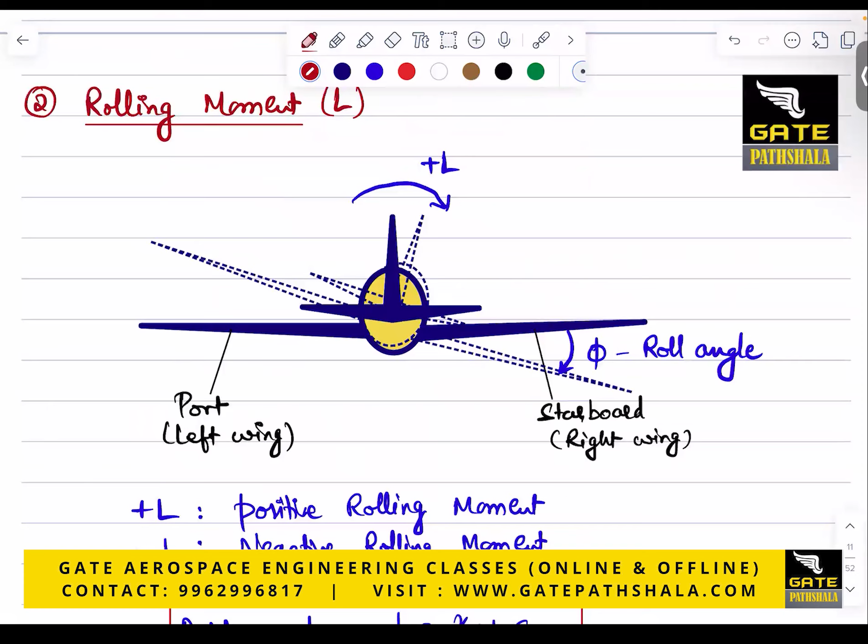What happened? I am unable to hear you. Can you repeat that? Pitching formula. I gave that already. There will be c here, whereas in the rolling you will have b there, and here it will be Cm. There it will be Cl. Right, third one.

Yawing moment. And about which axis is this moment? Longitudinal. Correct. It is the moment about the longitudinal axis. Okay. Now you write yawing moment. It is denoted by N, and it is a moment about the directional axis.

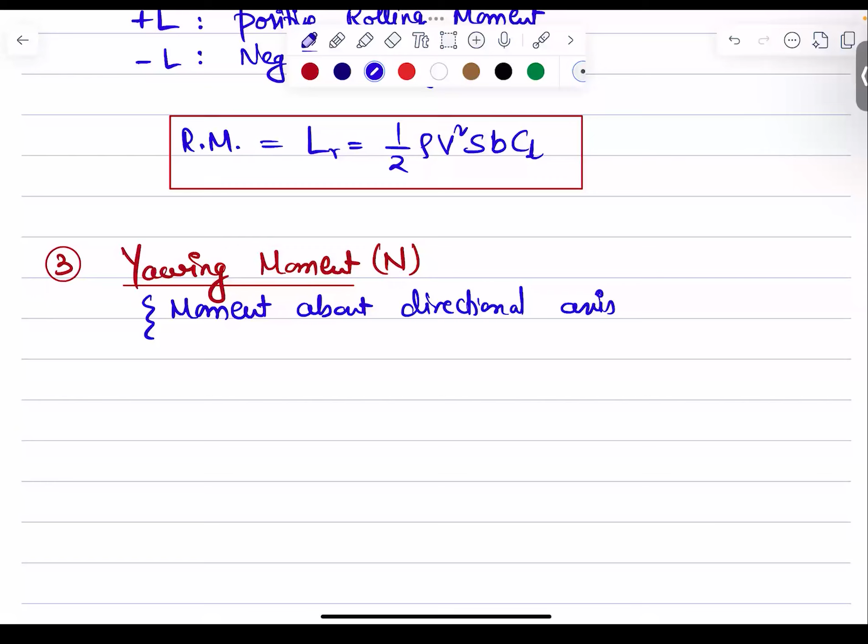So this directional axis will be the Z axis. The moment about the longitudinal axis is your X axis. And the moment about the lateral axis is your Y axis. Please do that. In pitching moment, you write lateral axis, beside that write Y axis. It's the moment about Y axis. This is the moment about X axis, and this is the moment about Z axis. So you'll be seeing things from the top view now.

Let me pull out one nice figure from my self-created library. Just a second, guys. Take this. Draw an aircraft like this. Rotate about the CG. So this angle is your yaw angle. We mark this with psi. Psi is yaw angle. There will be some rate of yaw, and all that we'll see later.

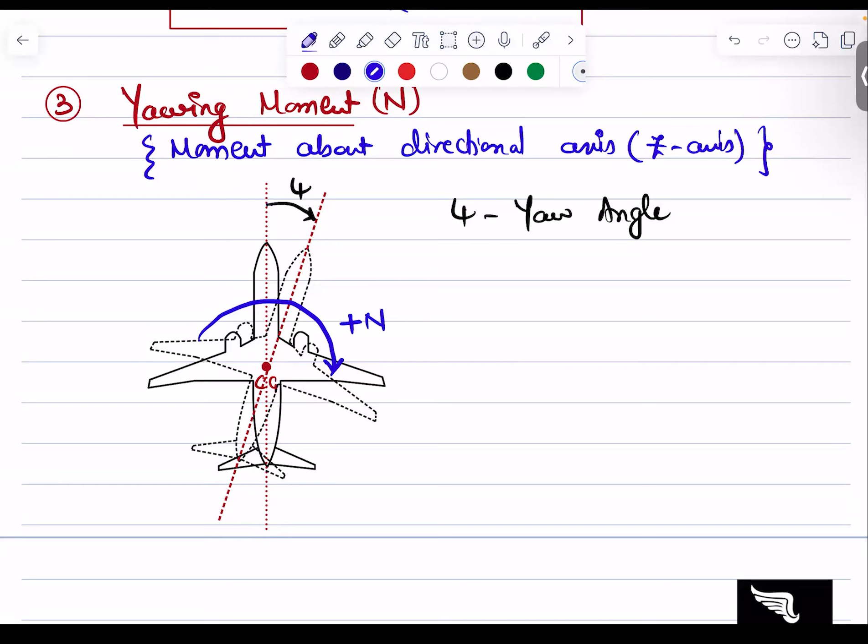So if your aircraft has a moment developed like this about its CG, where your starboard wing goes back, this is called positive yawing. With respect to the pilot, if the plane is rotating about its Z axis towards the right side, the starboard wing will be going back and the port wing will be going forward. That is called positive yawing moment. So you write plus N is the positive yawing moment. Minus N, you write negative yawing moment.

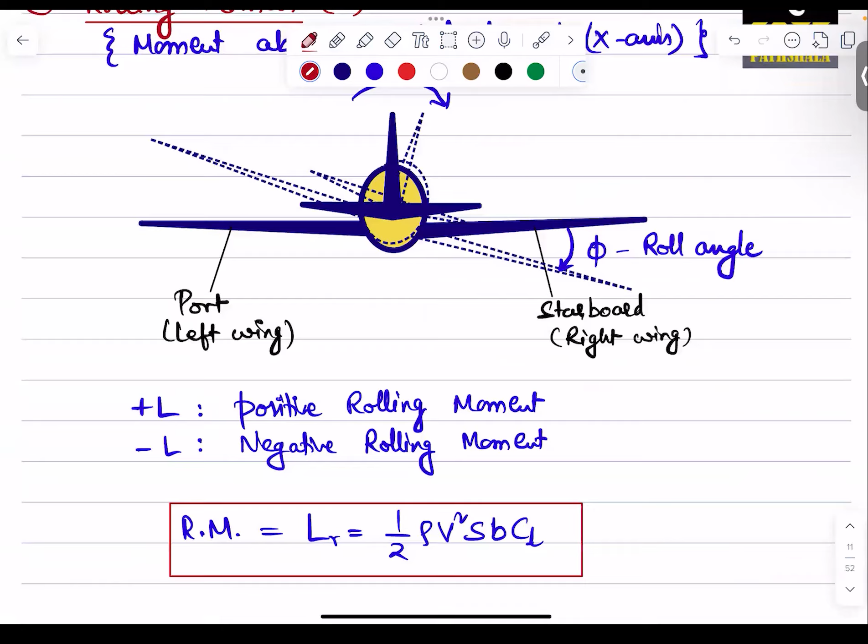So this yawing moment N is equal to half rho V square S b into Cn. You can write C capital N or C small n. It's better you write C small n. Bracket this. I believe it is equation 11. Check. No, that was 6, this is 7, and this one is 8. Call this equation 8. Any doubts so far?

Rohan, are you there in class? Yes, sir. Are you getting this? You're also from mechanical. There are many people from mechanical also. Are you getting this? Yes, sir. See, if you study step by step like this, aeronautics is very easy. Otherwise, rocket science is very tough. Okay? Please don't miss out any classes, and it will be easy.

Okay? I hope you know your father is my guru. Oh, okay, sir. Yes, sir. He's my professor in IIT. He was my gas dynamics professor. Oh, that's very nice, sir. Yeah, thank you. Thank you, sir. I'll help you in this. Don't worry.

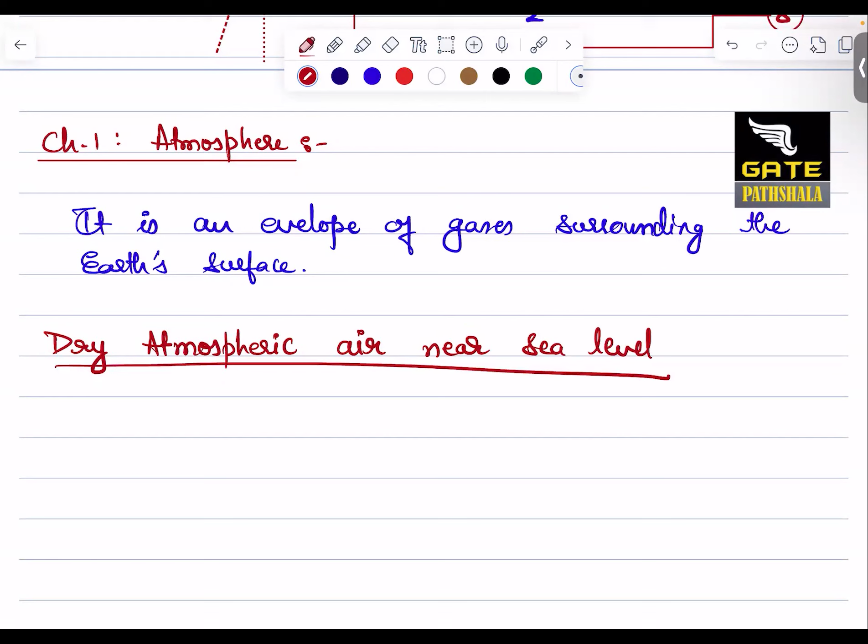Write a heading. So here we are talking about dry atmospheric air first. Let's discuss that. So write a heading, dry atmospheric. Dry means we are not talking about the humidity here. The moisture content means moisture is represented with humidity. So dry atmospheric air near sea level. So this is as per US standard. There is a US standard atmosphere.

Okay, 1962. Fine. So you make one nice table. There are different atmospheric tables like this. We usually refer to this one. So if you are conducting an experiment in laboratory, these values will give approximate data. You should measure your pressure, temperature, density in your laboratory when you conduct experiments instead of just sticking to this data.

Okay, so make it open columns. The bottom, don't close it. There will be a lot of things. Here in this left hand side column, you write a heading, constituent gas and formula. And here you write content, that is percent by volume. Percent by volume.

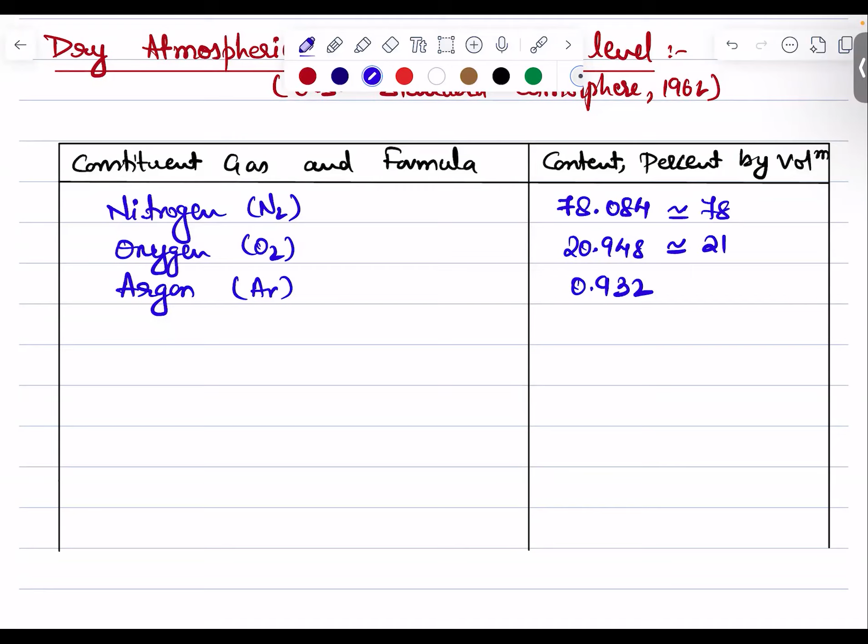So the remaining, not even 0.1%, is the remaining gases. That is carbon dioxide, CO2, neon, Ne, helium. So why are we interested in atmosphere? Because we are going to have flight mechanics. Our flight will fly in this atmosphere. So we must know how the gases are, what are the layers, and how to perform calculations and all that. Then krypton,

then methane, then nitrogen dioxide, NO2, then nitrous oxide, N2O, sulfur dioxide, ammonia, NH3. Carbon dioxide already I took. Carbon monoxide, CO, and iodine. Right. Make a note of this, everybody. Be quick and put a closure to this table.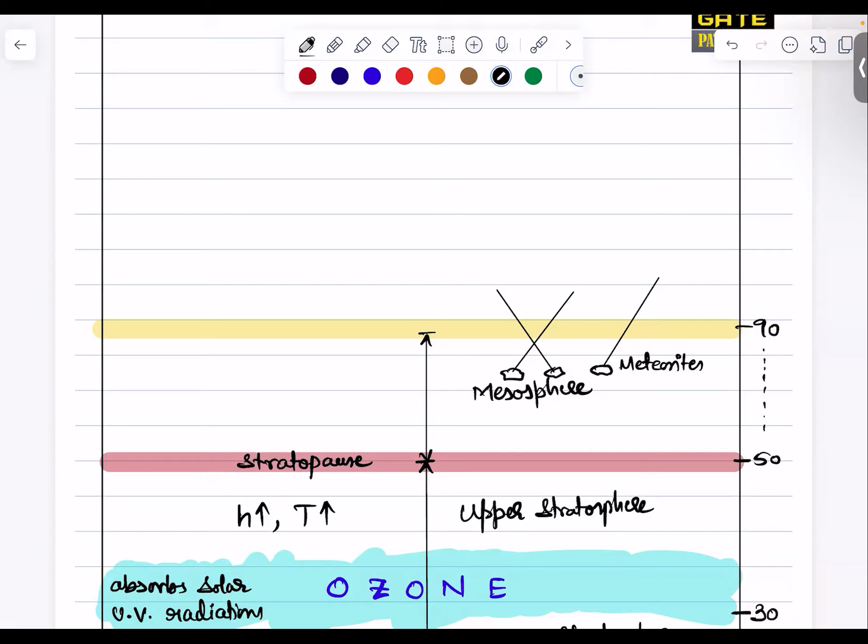Then above this, there is a huge distance. After a very long distance, somewhere around 500 kilometers, around 500 to 550 or 600 kilometers, you'll be out of the atmosphere. So this is a region up to which you have something called thermosphere. The temperature will be very high in this region. This is called thermosphere.

And beyond this, it's called the outer fringes of the atmosphere. This is what is called as exosphere. And further away, there is nothing there, we say no substance. So from here, it's a combination of mesosphere, thermosphere, and exosphere. These three combined, this region is called as ionosphere. Okay.

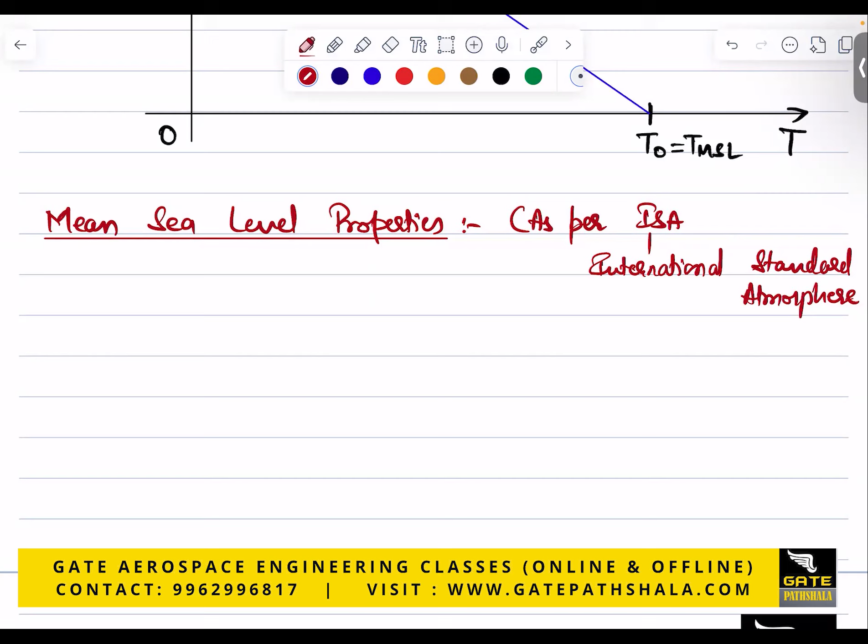So, mean sea level properties, in bracket you write as per ISA. ISA stands for International Standard Atmosphere. Here I'll be using MSL as the short form for mean sea level.

So you write, at MSL, pressure. At MSL pressure, we will denote with P MSL or P naught. Remember, this P naught is not stagnation pressure, okay? Stagnation pressure is something else, because in gas dynamics or thermodynamics propulsion, we use P naught for stagnation or total pressure. So this is not that. It is 101,325 Newton per meter square.

Density of air is rho at MSL, which equals rho naught, that is 1.2256 kg per meter cube. In temperature, T at MSL equals T naught, that is 288, that is 288.15, but you take 288, that is fine. Or you can say 15 degrees Celsius.

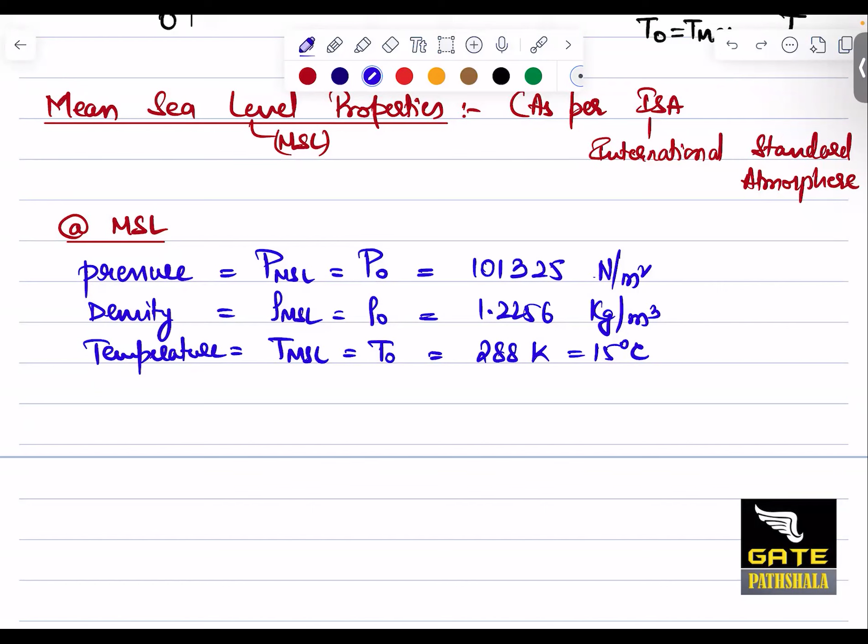But in our laboratory, if you mug this up and use it for experiments, that is a very bad thing. Because in Chennai, where I am, in my lab roughly the temperature will be between 30 to 31 degrees Celsius in the day.

So then you write dynamic viscosity or molecular viscosity of air, mu naught, that is 1.714 into 10 power minus 5 kg meter inverse second inverse. Or the best way is to remember Pascal second, the best units.

This is at not zero height. MSL means what is the height? Zero. But this mu naught is not at zero height. It is, as per the temperature, at 273 Kelvin, that is 0 degrees Celsius. Mu naught is the dynamic viscosity coefficient at 273 Kelvin, that is 0 degrees Celsius, not zero altitude. You have to bear that in mind.

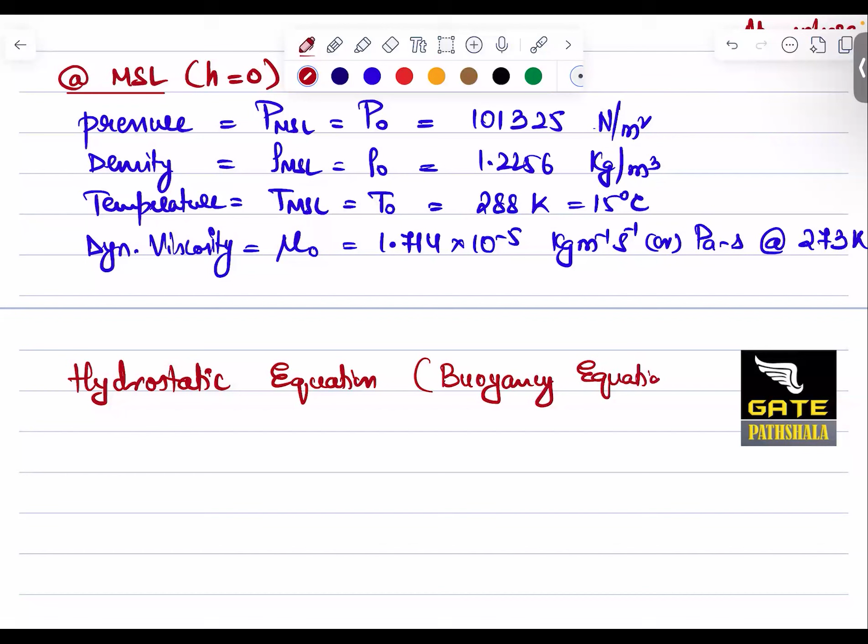Now you write the hydrostatic equation. This air present as a gas in our atmosphere, we assume it to be static, it is mostly static, right? So hydrostatic equation, also called the buoyancy equation. You must know this equation, I hope you know this: dP by dH equals minus rho g.

So if you are considering some sort of air column like this, as you are going up, this is filled with some gas. As you are going up, your density is going to decrease, you will start feeling lighter and lighter. So here, if you are at one level, P1, and you are going to P2, you will start feeling lighter and lighter. The weight of the column above this point is less, whereas the weight of the column above this point is more.

Okay, so the weight of air will start to reduce. That is what pressure actually is. Atmospheric pressure means the weight of this air column per unit cross section. So you have here...

You can write this equation as, mark this as equation 1. You can write, dP equals to minus rho g dH.

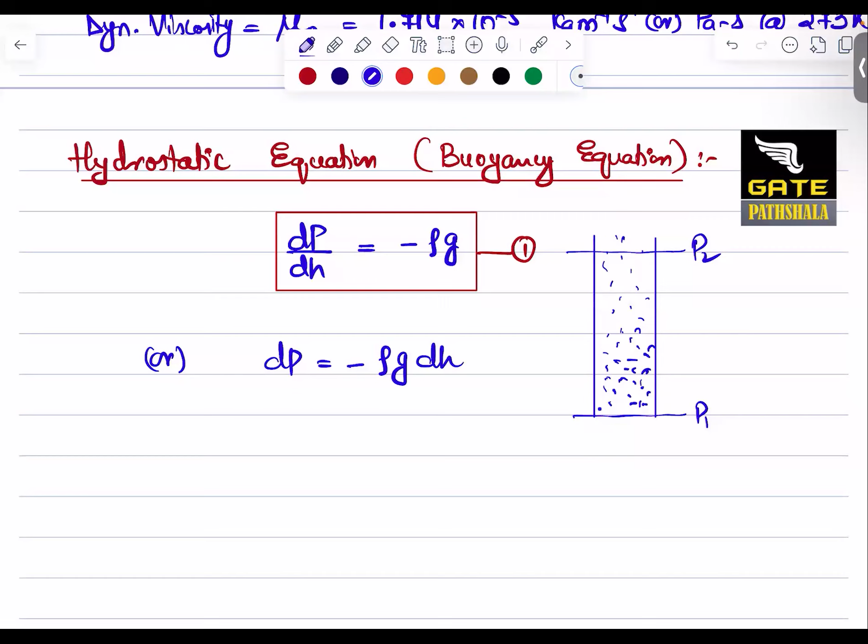Can I proceed further, everybody? Yes. So you write next subheading, equation of state. I usually say EOS. So P equals to rho RT. If I assume air to be working as a perfect gas, I can write the equation of state also working for it. Call this equation 2.

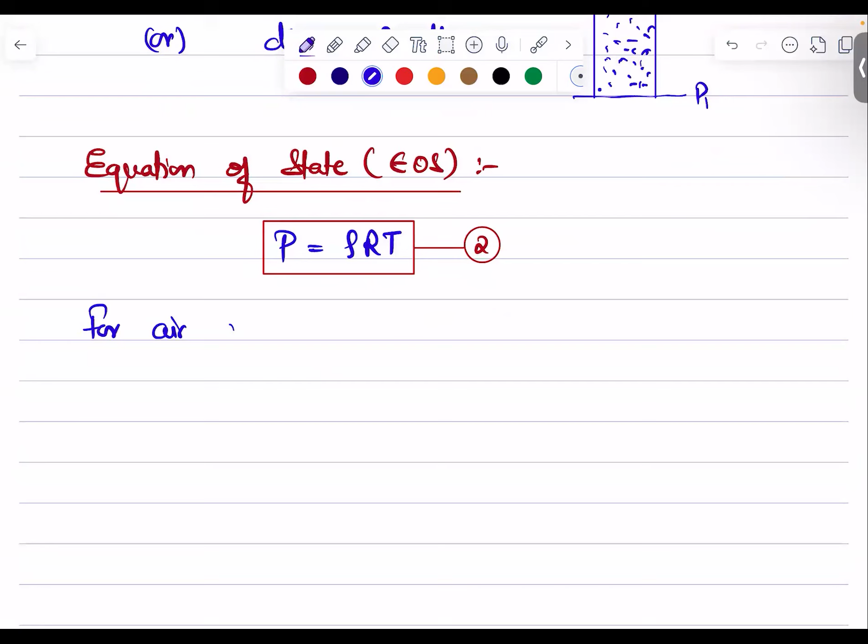Now we will assume one more thing, that for air working as a perfect gas, R is 287 joule per kg Kelvin, where R is given by R universal by molecular weight. This is 8314 joule per kilomole Kelvin, and molecular weight is MW, which is in kg per kilomole.

So the units are 8314 divided by MW for any gas, that is for air, this is for any gas. For any gas, R will be this. The units will be joule per kg Kelvin, kilomole.

Hope you all noted this. What is MW here? It is the molecular weight of the gas. Here your gas is air. If you know R, reverse way, can you tell me at least what is molecular weight of air?

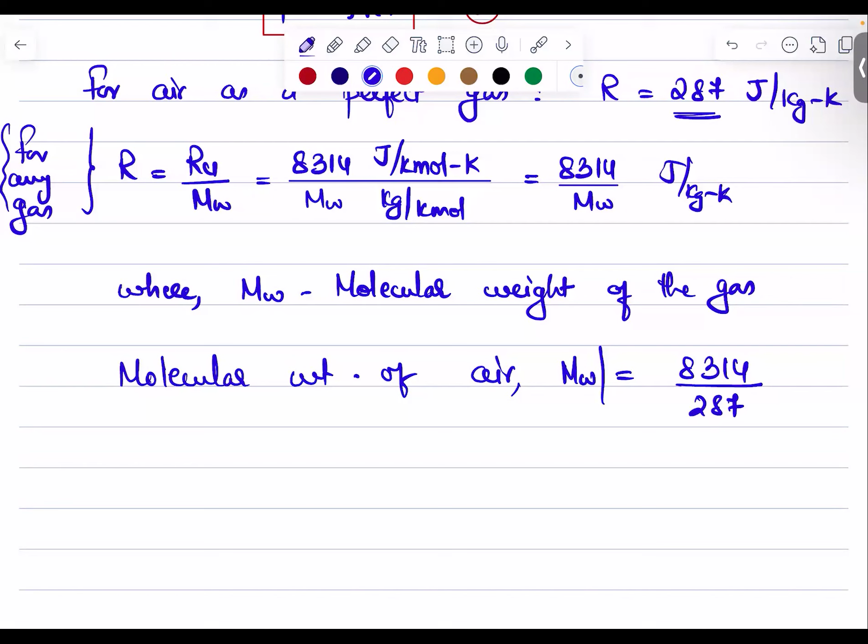Come on. 8314 divided by... 30 or 20 something. Check that again. 28.9, why it changed suddenly? Instead of 287, I put 277, sir. Okay, 28 point 9, one more decimal, 28.9. Is it zero there? 28.968, okay, stick to 968.

That is kg per kilomole. 28.968 kg per kilomole is the molecular weight or molar mass, what you said.

Right, next heading. So now we want the tropospheric calculations. First in our atmosphere, what we have? Troposphere. So we will be doing calculations for this region first, then we'll go for the rest. Above that, we are not doing space missions as of now, so we don't worry about that. So you write a heading, tropospheric calculations.

So what equations will work, you know. Between the altitude ranging between 0 and 11 kilometers, you are allowed to use these equations. So we have two equations. From equations 1 and 2 in this atmosphere, what we can write? dP equals to minus rho g dh. And by equation of state, P is rho RT. So you can cancel off rho and you can write dP by P equals to minus G upon RT dH.

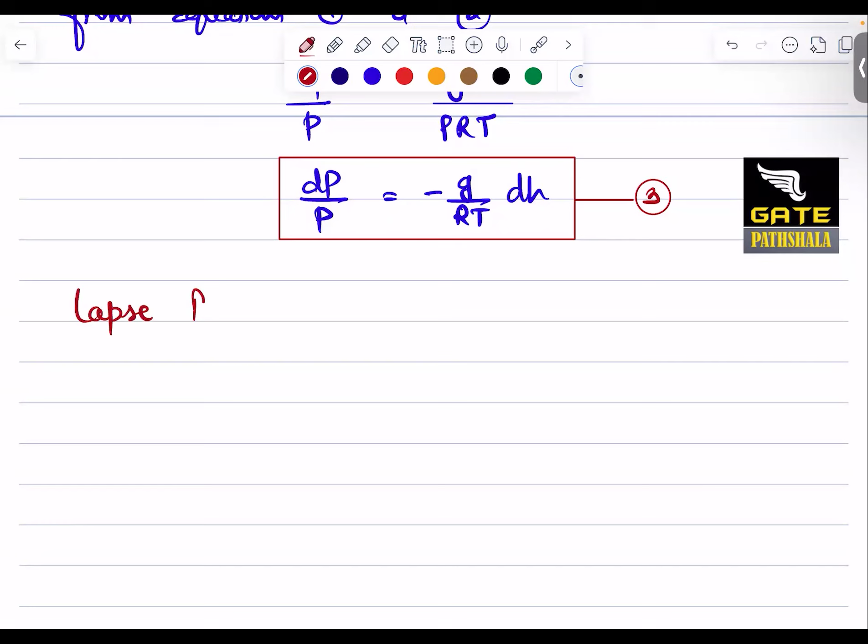Write a heading, lapse rate. At least tropospheric calculations will finish off. In troposphere, temperature decreases with increase in altitude h, following a lapse rate lambda, which is given by lambda equals to minus dt by dh. Bracket this, call this equation number 4.

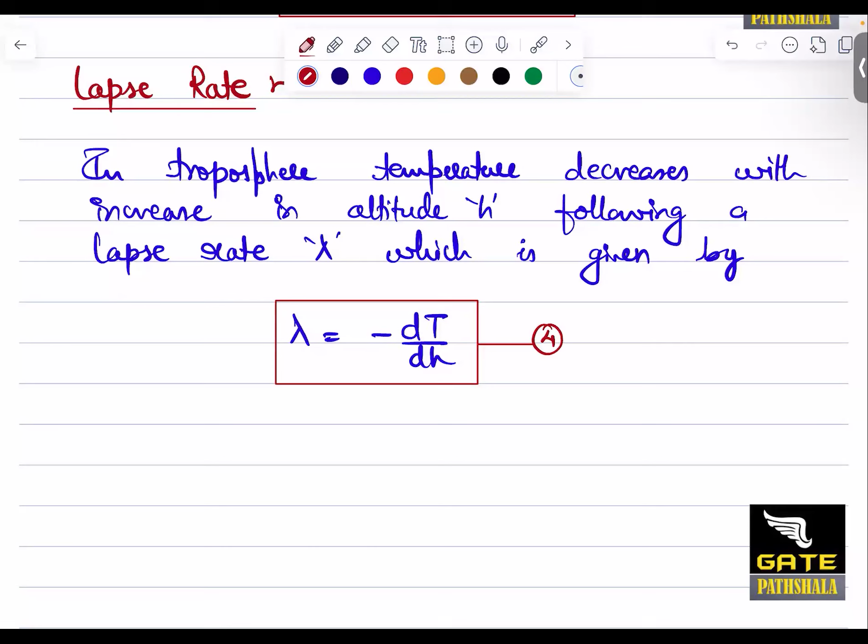Now, in this troposphere, between 0 and 11 kilometers, I am drawing a small schematic for different altitudes. So this is, let's say, MSL, mean sea level. Here you call this H1. Here P1 equals to P0 and rho 1 equals to rho 0. When I go to a height H2, the pressure here is P2, temperature is T2, density is rho 2. This H2 be equal to some H, so that I can have some general relation between them.

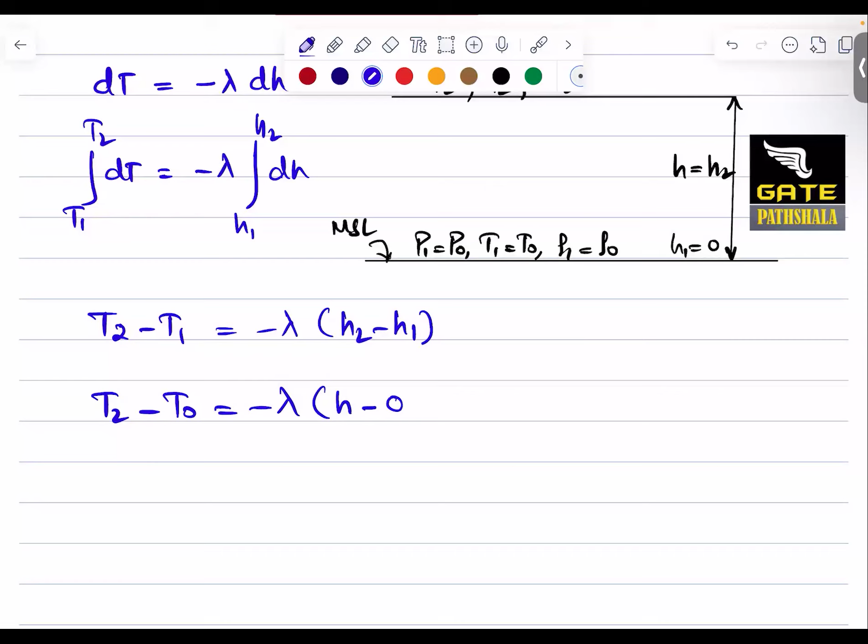So I can write, from equation 4, dt equals to minus lambda dh. Integrating this from T1 to T2, and placing the limits H1 to H2, you will get T2 minus T1 equals to minus lambda into H2 minus H1. So here T1 is T naught, H2 is H, H1 is 0. So I'll get T2, let this T2 be equal to some T at that height.

So I can replace this T2 with some general T at a height. You can write T equals to T naught minus lambda H. This is a very important expression. Bracket this. Call this equation number 5.

Hope you all are with me, everybody. Yes sir. Okay, just a few more steps and we'll be through with this, guys. I don't want to stop in the middle of this tropospheric calculations. Please bear with me another 5-10 minutes.

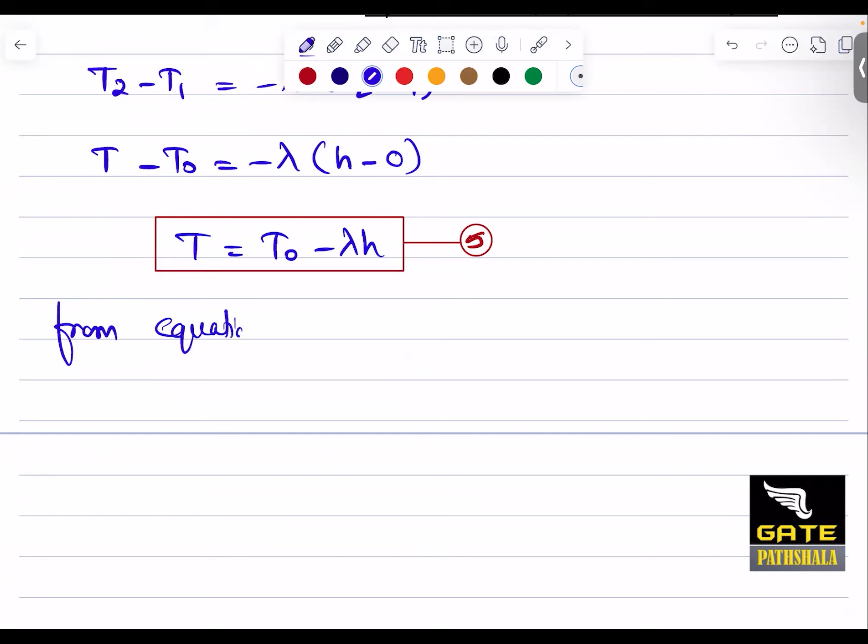So from equations 3 and 5, we can write dP by P equals minus G by R dH, by T. T is T naught minus lambda H. Now we've got it as a function of H.

Now I can integrate this from P1 to P2, and I can integrate this from H1 to H2. So this will become ln P2 minus ln P1 equals minus G by R ln of T naught minus lambda H, divided by the derivative of this term, which will be minus lambda, from H1 to H2.

Substitute that, so this will become ln of P2 by P1 equals G by lambda R ln of T naught minus lambda H2, minus ln of T naught minus lambda H1. If I make use of this, I can write T2 equals T naught minus lambda H2, and T1 equals T naught minus lambda H1.

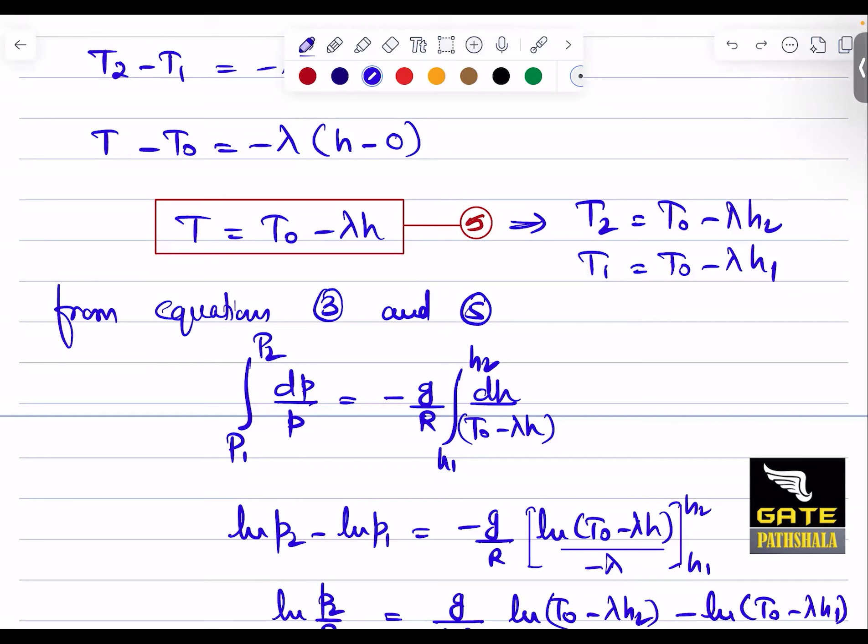So I'm going to make use of this below. You better write this beside equation 5, everybody. We are almost through with today's lecture, just 4 more minutes and I'll wrap up. Can I proceed, everyone? Yes sir. So what do I get here?

I'll get ln of P2 by P1 equals G by lambda R ln of T2 minus ln of T1. That will become, please place that proper bracket, so this will be ln of T2 by T1 whole power G by lambda R. Can I write like that? Right hand side.

And my left hand side is ln of P2 by P1. So I can take anti-log on both sides, and I'll get, therefore, P2 by P1 equals T2 by T1 whole power G by lambda R. So with this formula, between any 2 points in the troposphere, you can find the pressure ratio, and from that you will get the pressure. So call this equation 6.

We all know the equation of state. So by equation of state, you can write P2 equals rho 2 R T2, and P1 equals rho 1 R T1. So I am interested in getting rho 2 by rho 1. Rho 2 by rho 1 will be P2 by R T2, divided by P1 by R T1. If you cancel out the R R, you'll get P2 by P1 into T1 by T2.